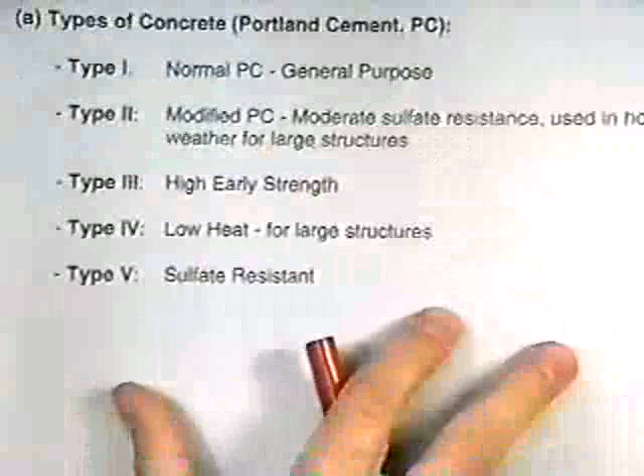First of all is the mixing of the concrete. There's all different types of cement. Basically it's called Portland cement, and it's a mixture of Portland cement, sand, aggregates, and water, and other types of additives, which creates a mix called concrete.

There's all different types of Portland cement. Type 1 is normal cement, which is basically what you see in probably 90% of construction - it's general purpose type cement. The second is a modified Portland cement, which has moderate sulfate resistance and is used in hot weather for large structures. Type 3 is an early strength type of cement, so it'll give you 28-day strength in 7 days. Type 4 is a low heat of hydration, used in dams and things like that. Type 5 is for a very corrosive environment where it's sulfate resisting.

Now, how do you proportion concrete? Normally it's designated as a ratio of cement to fine aggregate to coarse aggregate. The fine aggregate is your sand, the coarse aggregate is your stones. Typically this ratio is something like 1 to 2 to 3. The ratios can be in terms of weight or in terms of volume.

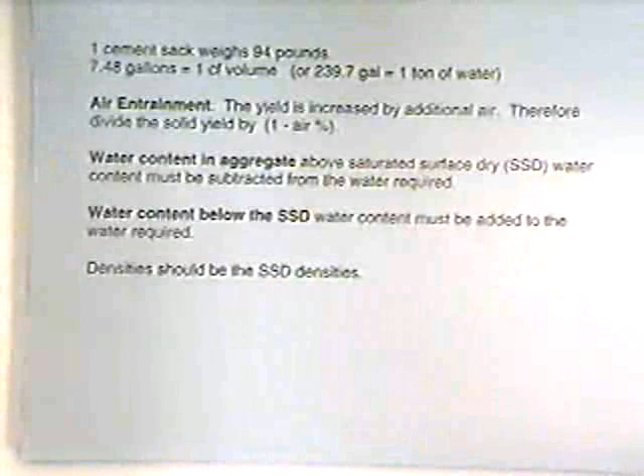We talked a little bit about air entrainment, or voids. You put some voids in the concrete for a lot of different reasons, temperature, etc. When you put voids into the concrete, it's going to increase the volume of your concrete. So basically we're going to increase the yield by additional air, and what you do is divide the yield that you expect in your concrete by 1 minus the percentage of air, which is going to give you a bigger quantity.

The water content in the aggregates above saturated surface dry must be subtracted from the total water required. Now, just imagine sand sitting out in a field, raining like crazy - that sand is going to be drenched, soaking wet. You have to figure out how much additional water is in that sand when you put it into the mix, and then subtract that off the water required for the mix. Same thing goes with stone - if it's very dry, you need to add additional water.

The density should be saturated surface dry. Normally that's specified by the manufacturer, by the batch producer. So here's a quick example.

A mix is designed such that the ratio between cement, sand, and stone is 1 to 1.9 to 2.8 by weight. The water-cement ratio is 7 gallons of water per sack of cement. So what we want to know is the concrete yield in cubic feet per sack of cement, and how much of each constituent is needed to make 45 cubic yards of concrete.

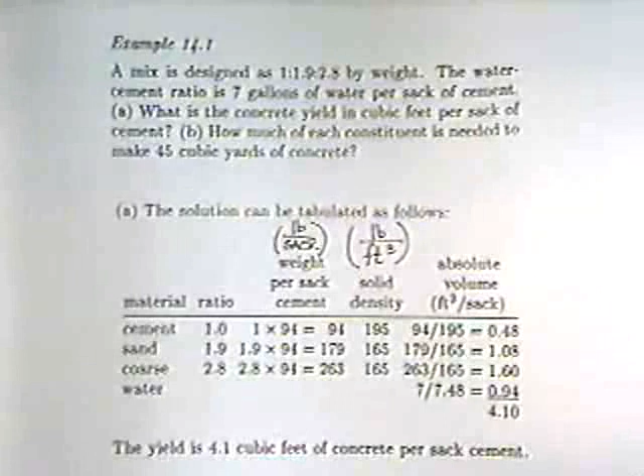Typically what you're going to do is set yourself up a little table. It's all a little mathematical trick - you watch your units, and then you can back calculate and figure out your yield. Your materials are cement, sand, and aggregate, with water down at the bottom. I already told you the ratio was 1 to 1.9 to 2.8.

If you talk about the weight per sack of cement, we know cement weighs 94 pounds per sack, so you multiply your ratios by 94, and you come up with 94, 179, and 263 pounds per sack. Now the solid density of each material is in pounds per cubic foot. If you divide your first column by the second, you get the amount of volume. Watch your units - the pounds cancel, and what you're left with is cubic feet per sack.

If you add the three terms up, plus the part required for the water, which is 7 gallons of water per bag of cement, and recall that 7.48 gallons of water is 1 cubic foot volume of water - if you add all these volumes up, what you get is 4.1 cubic feet of concrete per sack of cement.

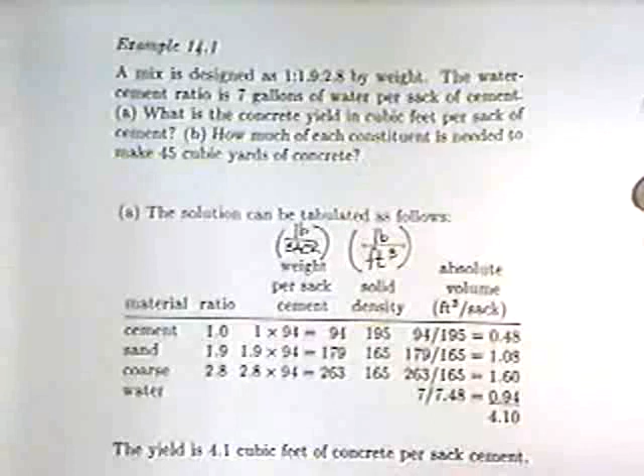So the number of sacks that you need can be found from this formula. We know we need 45 cubic yards, and 27 cubic feet is 1 cubic yard. If you divide this by the total yield we found before, watch your units, everything cancels out, and you're left with 296 sacks, or we can say 297.

So how much of each material do you need to order? It's the 297 bags times its ratio. Going back to that first sheet, the cement had a ratio of 1, the sand was 1.9 times the 94, and the aggregate was 2.8 times the 94. This gives us 26.5 and 39.1. You can figure out your total gallons of water, which turns out to be a little over 2,000.

So basically, you just watch your units with these types of problems. Second example: 50 cubic feet of 1 to 2.5 to 4 by weight of concrete are to be produced.

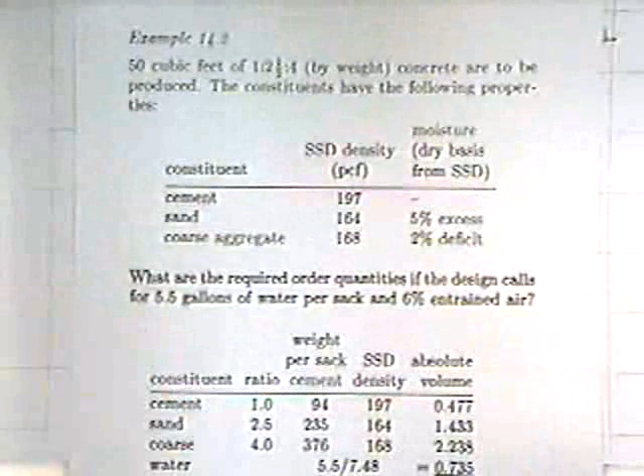The constituents have the following properties: cement is 197 pounds per cubic foot - that's the saturated surface dry density. The sand has 164 and the coarse aggregate has 168. Now the moisture is also given for each of these specimens - the sand has a 5% excess of water above the saturated surface dry weight, and the coarse aggregate has a 2% deficit.

So what's the required order quantities if the design calls for 5.5 gallons of water per sack and 6% air entrainment? Remember, air entrainment creates voids, and what we're going to do is increase the yield by 1 minus this percentage. You'll see that on the next sheet.

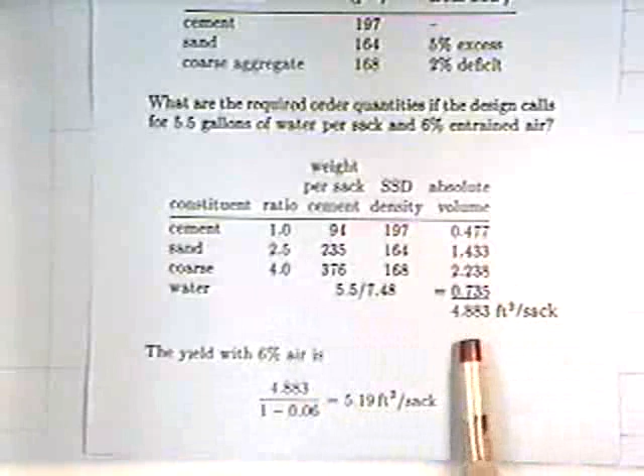So again, set yourself up a little table - you've got cement, sand, your coarse aggregate, and water. The ratios are 1 to 2.5 to 4. The weight per sack is 94, 235, and 376. Saturated surface dry you find from the previous table, and if you divide the third column by the fourth, you get the amount of volume, and when you add it all up, you get your total yield. This turns out to be 4.883 cubic feet per sack.

And again, because we're adding air to it, we're going to increase that yield. So we divide by 1 minus 0.06, and you come up with about 5.2 cubic feet per sack.

Now, if you need to make 50 cubic feet, what you need to do is divide your 50 cubic feet by the amount of yield based on 1 bag of cement. This gives you 9.63. So typically we would say, all right, let's use 10 bags of cement.

Okay, well in this problem they just used the 9.63, but you multiply your 9.63 for finding the required amount of sand. It's the 9.63 times 1.05. Now, the reason the 1.05 comes is because the sand has a 5% excess of water. The amount of sand that you're getting is actually a little less, that's why you have to use 1.05 here.

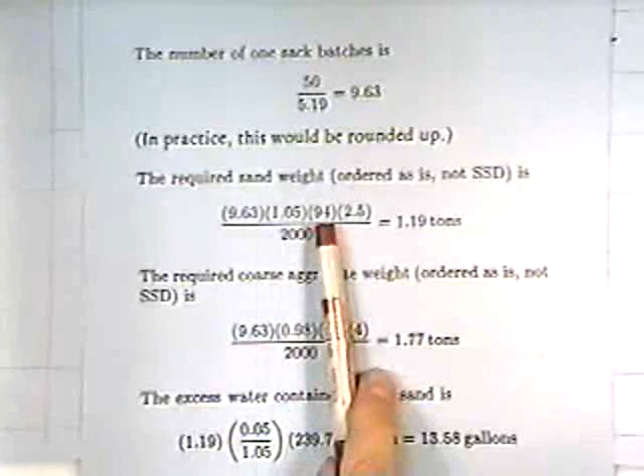Times the 94, which is the weight of the sack, times 2.5, which is based on the ratio between cement to sand. Divide by 2,000 to get you into tons. It turns out to be 1.19 tons.

Same thing goes for the coarse aggregate, except this time we have a 2% deficit of water, and that's where the 0.98 comes from. This gives us 1.77 tons.

The excess water in the sand you can calculate from this formula. It's the 1.19 tons from up here, that's the amount of sand that you're using. You have a 5% excess, divided by your 1.05 - that's basically just like a ratio, the amount of water as compared to the amount of sand.

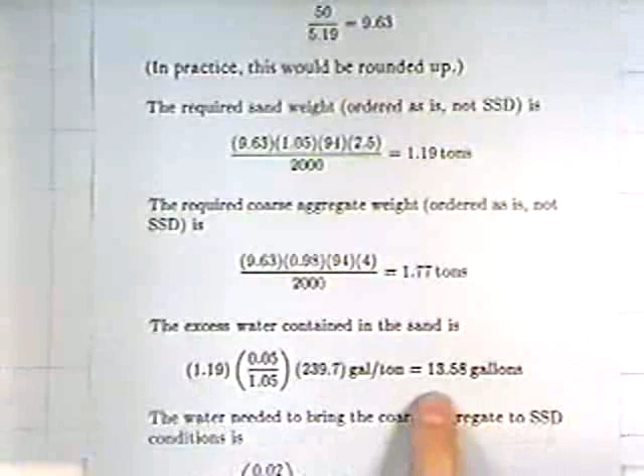Times your 239.7 - and I'm trying to think of where that comes from. That's gallons per ton. How many gallons per ton of water? The ratio, 2.3. This here, 239.7 is a constant. Okay, that's probably the weight per ton, right? So it's the amount of volume per unit of weight. Okay, that could be. And that turns out to be your 13.58 gallons.

And the same thing goes for the aggregate - you can figure that out, it's basically the same formula with the same constant. This turns out to be a deficit of 8.66 gallons.

So your total water requirements are the parts required for the mix, plus the additional part from the sand, which was the 8.66. And we know that the stone had an insufficient amount, and we needed to add on an additional 13.58. This gives us a total weight or total volume of water of 48 gallons. Okay, these types of problems are basically watching your units.

So would you subtract that excess water from the sand, the 13.58? Okay, so you got it - I'm sorry, I think I said that wrong. The 13.58 was from the sand, right, that's the additional part from the sand. The 8.66 is below the saturated surface dry for the stone. So when you figure out your total volume of water, it's the part required for the mix, plus the additional part that you need to add in for the stone, minus the excess from the sand. Okay, I think I said it right that time. I wasn't turning my pages quick enough.

Now, some of the properties of concrete. First of all, we have a slump test, and what that is, is a measure of concrete plasticity, how easy the concrete's going to flow. Typically when we do this test, it's going to be in the area between 1 inch and 4 inch.

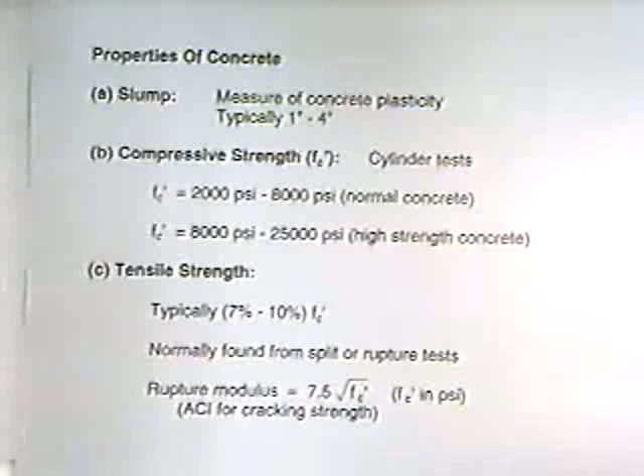The tensile strength in concrete is typically about 7 to 10% of FC prime. Concrete is very strong in compression but very weak in tension. We find the tensile strength either from a split test or a rupture test, and if we do the rupture test, ACI has come up with a conservative strength value of 7.5 root FC prime, where FC prime is in PSI. I'll be bringing this term up a little later in the lecture.

The shear strength is a little greater than the tensile, but still significantly less than the compressive strength. It's about 16 to 25% of FC prime. ACI, in section 11.3.1.1, says that the capacity of concrete in shear is 2 root FC prime times B times D.

The density for normal reinforced concrete is about 150 pounds per cubic foot. For lightweight concrete, it's about 120 pounds per cubic foot. The modulus of elasticity, the code in ACI says to use either one of these two equations. 57,000 root FC prime is sort of an easier one to use because you don't have to worry about this exponent, and typically this is about 3,600 KSI if your FC prime is about 4,000.

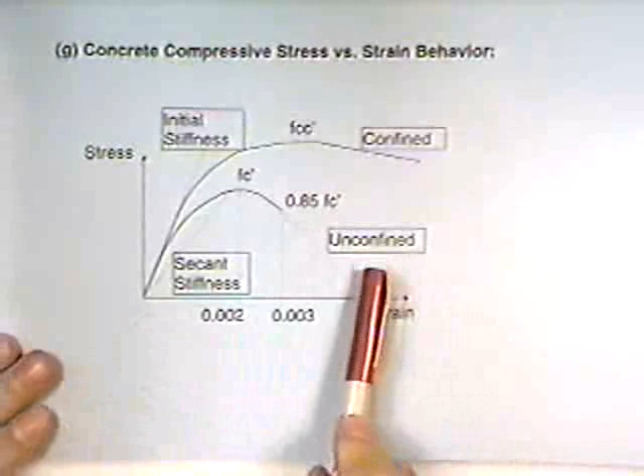Now, just think about if you take this cylinder and try to confine it laterally. What's going to happen is that the cement mix can have a lot more strength. That's a value referred to as F sub CC prime, and that increase in strength can go up from 20% to maybe as much as 50 to 75%.

The other big thing to note is that when it's unconfined, this point drastically fails very fast. It's very brittle. If you confine it, this level of strain can go out to a very large range, which means it's more ductile. For earthquake zones and when dealing with blast loads and things like that, you would always want your sections confined just based on this property alone. It's increased ductility. I'm not going to talk much about that.

Could you give an example of the difference between confined and unconfined concrete?

Okay, if you have your cylinder, what we're going to do is put a compressive load on it. If you just go ahead and load this thing until it fails, we're going to get that lower bound curve.

Just imagine if you came here and put some straps all the way around the cylinder, and then you load this guy up. What's going to happen is that failure plane—the way the cylinder is going to fail is sort of like this. It'll split on a diagonal fashion, close to 45 degrees.

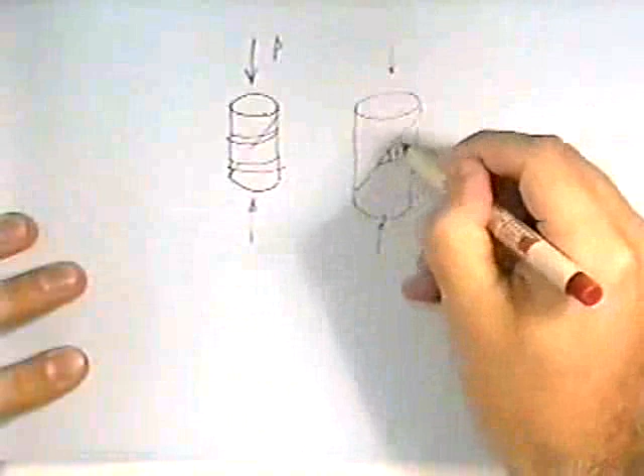Now if you come in here with these straps to try and prevent that crack, I think it's obvious that the strength is going to go up. Do you see that? And if you make these bands of a very ductile material like steel, what happens if these bars begin to yield? Then you can think about that yield deformation continuing to go on. It's going to be a much more ductile section.

Okay, so that's really what confinement is. And these are important for column members, for bridge-type structures—think about your piers. In all these earthquakes, whenever a bridge falls down, it's pretty much at the pier. If you look, it collapses right below the slab deck or right above the footing, because that's the maximum stress zone. Part of the reason is because it fails in shear, like this type of mechanism. One way to avoid that is to put in additional straps, to avoid that failure mechanism.

So what we're doing is—the original situation may have performed like this, where once you got to this level of force, the strength degraded really fast. But during an earthquake, you really don't know what the level of force is. So what if it hits its peak? The only thing we want to do is make sure that it can take additional deformation. And you see when a specimen is confined, it could take that additional deformation. Deformation corresponds to strain.

Same thing goes in a blast type load, or hurricane, or any other type of catastrophic load. I doubt if you'd be asked that in the PE though.

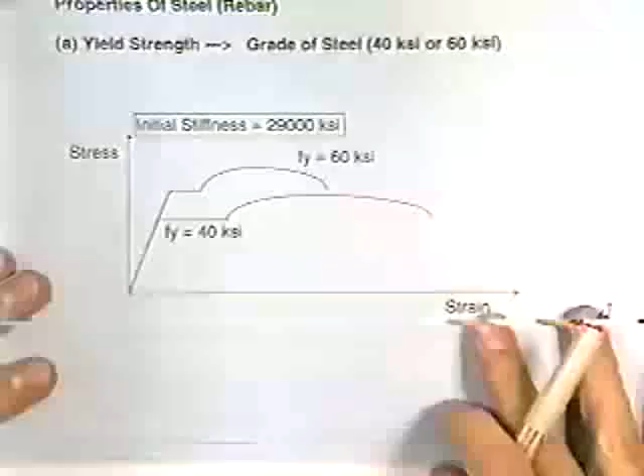Now, rebar—I think everybody knows what its characteristics are. Again, stress versus strain. If you have a grade 40 bar, it's going to load up basically along a linear line. That stiffness, E, is about 29,000 KSI. Once it hits its yield strength, there's what's called a yield plateau, and then there's a slight increase in strength. That's called strain hardening, until it reaches its maximum value, and then finally fails at its fracture strength.

The only one that we're really concerned about is its yield strength, because that's the one we're going to design with. The difference between grade 40 and grade 60 steel: number one is the increase in strength, and number two, you'll notice the grade 60 steel did not go as far in strain or deformation. The reason is because it's a little bit more brittle. But still you have considerable ductility even in the grade 60 steel.

When you start getting up to 120 grade steel, those things will load up, hit its peak strength, and then come down and collapse right here. So you can see it's very little ductility, and a lot of pre-stressing tendons have this type of characteristic. So what you do for this case is just make sure that your demands are always in here and you don't have anything to worry about. For rebar, if it hits its yield strength, so what? You still got all this deformation capacity back here.

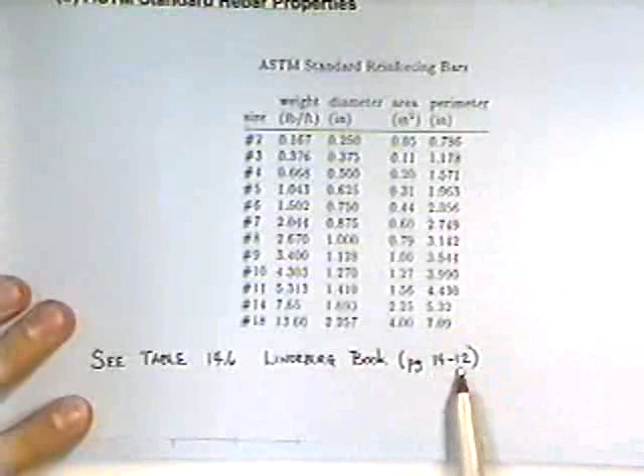I'm also going to leave you a little note here—it's on page 14-12 of the Lindeberg book. I believe this table has all the different sizes of bars plus the number of bars quantified. So if you have an area of steel required of, say, 6 inches squared, you can look up into that table and try to figure out what's the best combination of bars to use to match that 6 inches squared. So that's a handy table too.

Is that true? Well, yeah, that 8/8 bar, 7/8 bar, 6/8 bar numbering, past number 8 bar, that doesn't work anymore. For instance, look at number 10 bar - it doesn't have 10/8 for the diameter, does it? It's close, but not exact. I think it's a good approximation though.

But anyway, you've got all the numbers - you've got the tables in front of you. And you don't want to do pi d squared over 4 anyway. You just want to pull it right out of the table.

All right, now as far as concrete goes, it's ultimate strength design. There's no allowable stress design. I guess you guys are accustomed to that because you're using LRFD.

What we're going to do is take the actual loads and multiply them by what's called the load factor. And then we're going to compare that with loads that cause failure. We're going to try and find out what's the maximum that you can actually take the structure out to. That's how we're going to design it.

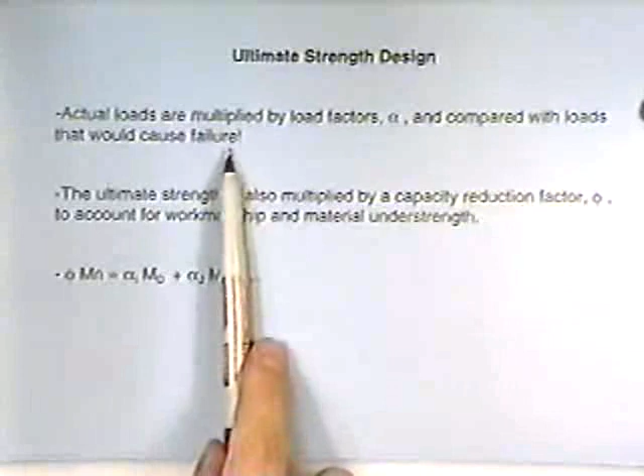And then we're going to check it for service type loading, so for deformations and things like that. I know a lot of times you'll be walking in a building and you'll find out that as you walk across the floor you start bouncing around.

Those are serviceability problems, not ultimate strength type problems. What we're worried about are earthquakes and things like that, or if you just came into a room and fully loaded it up with all the live load and dead load that you possibly can. You just want to make sure it doesn't collapse under that scenario.

Ultimate strength is multiplied by what's called a capacity reduction factor. Sometimes it's called an undercapacity factor, and it's defined as phi. What this does is, it's typically been referred to as a dummy factor, and it accounts for workmanship and material understrength and things like that.

So basically your equation is going to be phi times Mn, which is the nominal capacity, equal to the summation of all your alphas times your certain moments. So you'll have a certain load factor for dead load, plus a certain load factor for live load. And on the next sheet...

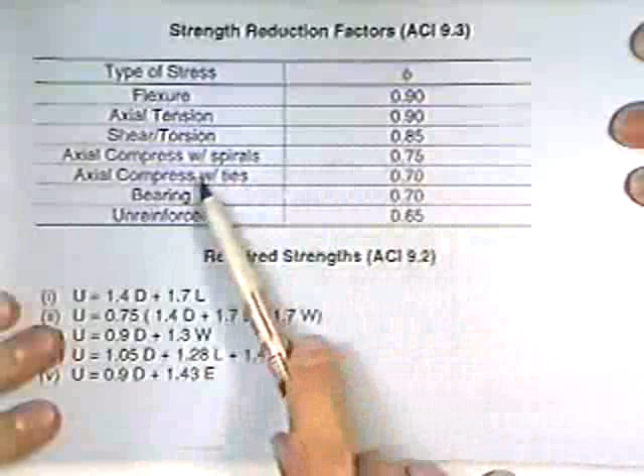Actually I quantify the phis first. If you're dealing in flexure, if you have a beam and you're dealing in bending, the phi is 0.9. If it's an axial tension member, it's 0.9. Shear and torsion is 0.85. Axial compression with spirals is 0.75. Compression with ties is 0.7. Bearing is 0.7. And unreinforced is 0.65.

The reason it's going down is because of the uncertainty. Just think about unreinforced as compared to flexure - it's a lot easier to find a flexural strength than it is to find an unreinforced strength. So that's why that factor goes down the whole way. This is ACI 9.3.

Now, again, what's a spiral? If you're in a column - confined concrete - and let's say your column is square, typically you'll have bars in the corner. And what you're going to do is provide what's called a hoop or a stirrup around these bars. This is referred to as a tie.

Now, if you're in a circular column, where your longitudinal bars are spaced around the diameter, you're going to put this stirrup in, which does something like this. If you look in elevation, these are your bars. It's going to be some type of spiral that goes all the way around, something like that. You understand that? Yes, thank you.

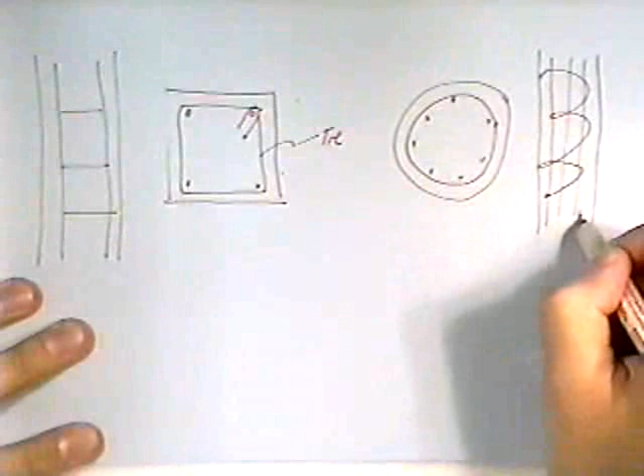Okay, where in cross-section for this guy, it's going to look like this. As far as confinement goes, this guy is much better. If you look inside the core here, as compared to this corner here, what happens in the corners is that you have some discontinuity, and you lose some confinement based on the corners, whereas if it's in a circle, it's a lot easier to confine something.

Just imagine wrapping your hands around something that's circular versus something that's square or rectangular - it's a lot harder to get your hands around it. So the effectiveness of the confinement is better for a spiral. Thank you. Okay.

Alright, now we went through the phis. As far as the load factors go, it depends on what you're looking for. If you're designing for dead load and live load only, there's only one combination to check: the ultimate demand U equals 1.4 times the dead load plus 1.7 times the live load. This is quantified in section 9.2 of the code.

If you have to deal with wind, there's two additional equations that develop. You get 75% of 1.4 dead plus 1.7 live plus 1.7 wind, and 0.9 dead plus 1.3 wind. So if you're designing a building for dead load, live load, and wind load, you need to check all three of these load combinations. What do I mean by check? You need to find shear and bending moment diagrams for each of these cases and develop what's called a moment envelope. Put all of these demands together, and whichever gives you the biggest moment, that's the one you design for.

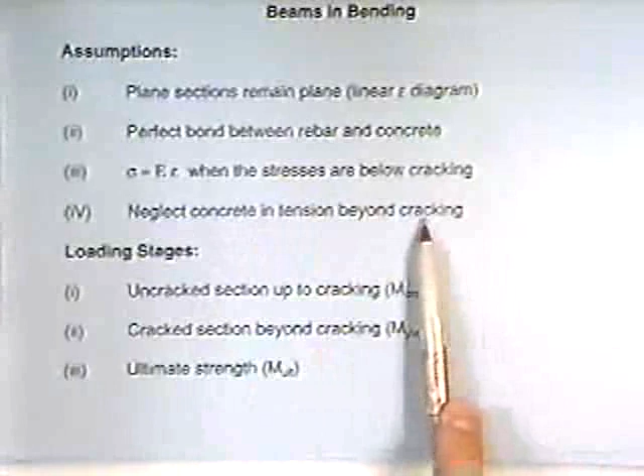This is elastic. Now, when the stresses in the concrete in tension exceed its cracking strain, the concrete is basically gone—there's nothing there. So what we do is neglect it. We only consider the concrete in compression when we're beyond the cracking strain, and this is important for ultimate strength. The criteria in number 3 here is important when we're considering service loads, when we talk about deflections.

The loading stages—there's three of them. Initially you have this beam with no load on it. So is any part of the concrete cracked? Probably not. Alright, so if you start to put a load on this beam, the concrete is going to continue to load, but it's still in the elastic region. It'll stay elastic up to its cracking strength, and that cracking strength I define to be M crack.

Now once it exceeds this value, the concrete cracks and the stiffness of the beam changes. That's going to basically load up along one linear line up to its yield strength, and that's when the rebar at the bottom begins to yield. It'll continue past this point up to its ultimate strength. Now I'm going to carry you through these three load stages.

The one that's important for flexure is this one. The one that's important for deflections is this one. This is because there's an equation where you have to find M crack and M ultimate, and I'll show you that later.

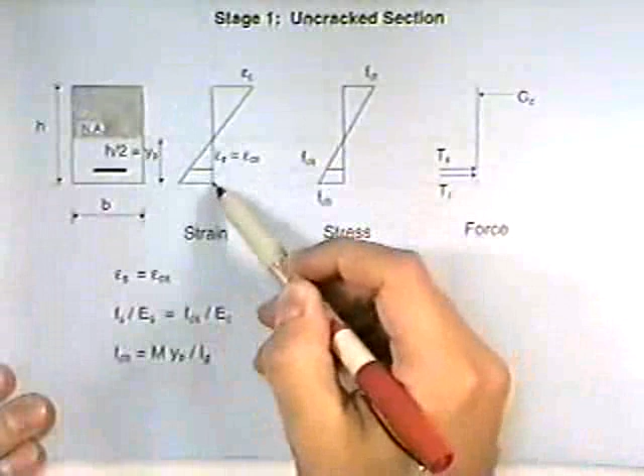Well, how do we find this cracking moment? You find that from strength of materials. We already know that the bending stress is My over I. Typically what we do to find the cracking strength is substitute for the stress F sub R, which is the rupture modulus—that's on the next sheet. So rupture modulus times I gross divided by Y sub B, where Y sub B is the distance from the neutral axis to the extreme tension fiber. F sub R is the allowable stress—in other words, once you exceed that stress, the concrete cracks. That's how we're going to determine our bending moment.

Now, once we exceed that crack capacity, what's going to happen is that the concrete at the bottom is going to begin to crack. The cracks are going to develop vertically, and that's why I got those dotted lines in there. Those things are cracks.

Now, above the neutral axis is where your concrete's acting in compression. You have your area of steel down here at the bottom, at a distance of D from the top. The distance to your neutral axis is what I define to be as X. The height is h, the width is B.

So because the neutral axis hit this point, we had cracking, the strain diagram looks like this, where we know this strain exceeds the cracking strain in concrete. The stress diagram is going to look something like this in compression, but notice there's nothing here at the bottom, again, because the concrete cracked and is no longer acting. The only thing that's acting on the bottom is the steel, so you have your stress in the steel, F sub S.

So what we're going to do to find this moment now is we have our stress distribution in the concrete in compression. This is a triangle, and what we're going to do is relate this stress back to a force, C sub C. We know the tension force here in the steel, and we have this moment arm, JD. Once we know JD and we know either C or T, we can find its moment, its yield moment.

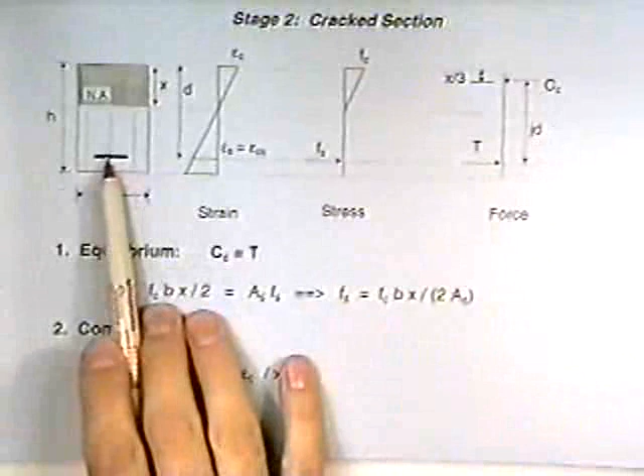Now here's how we're going to do this. Number one is equilibrium. This section is not moving, so the sum of forces must equal zero horizontally. So C sub C has to equal T. C sub C is the stress at this point, which is F sub C, times the area of the triangle. The area of the triangle is the base, which is this width, times the height, which is x.

Because it's a triangle, we have to divide by 2. The area of a triangle is 1/2 base times height. So you take your stress and multiply that by the area in compression of concrete, so that's F sub C times B times x divided by 2. T is just equal to the area of steel times the stress in the steel, which we know is F sub S. So what we're going to do is solve for F sub S, which is equal to F sub C times B times X divided by 2 times the area of steel. Is everybody with me up to here?

Okay, the next law is what's called compatibility. Just take a look here, you have a linear diagram, right? Well, what we're going to use is similar triangles. If I say that the strain in the layer of steel is epsilon sub S, the strain in that layer of steel divided by the distance from the neutral axis down to that rebar, which is a distance of d minus x, is equal to the strain in the concrete divided by x.

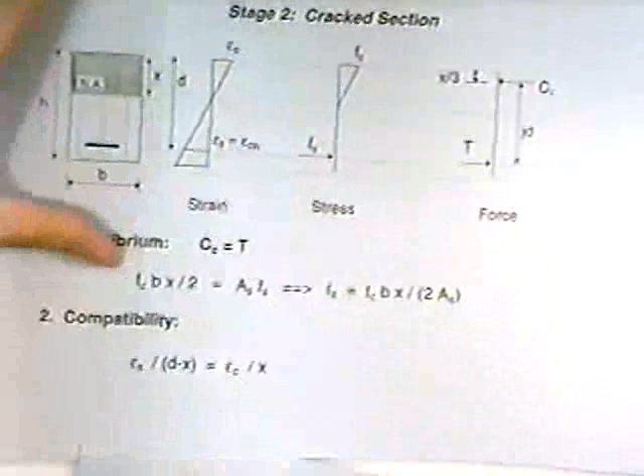Now the third law is what's called Hooke's law, or the constitutive law, and that's when we know that the stress is equal to the modulus times the strain. So we know the stress in the steel is equal to the modulus times the strain in the steel, and the stress in the concrete is the modulus times the strain in the concrete. Now, if you substitute these strains into here, and then plug those back into your first equation, what you get is this equation on highlight 4.

You get x squared is equal to 2 times n, where n, I guess I don't have that here, n is the E of the steel divided by the E of the concrete. So you get x squared plus 2n times a sub s times x divided by b, minus 2n times a sub s times d divided by b. If you take a look in this expression, the only thing you won't know in this section is x.

Rho is equal to the area of steel divided by BD, that's the reinforcement ratio. And what I'm going to do is define another term, which I'm going to call KCR, or K crack, and that's equal to x divided by d. Now if I plug these two equations back up into here, what I get is one expression for K, and that's equal to the square root of rho n squared plus 2 rho n, minus rho times n.

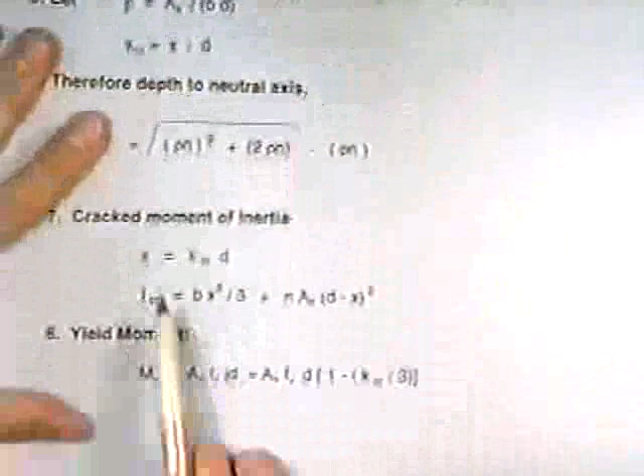Now, once I know this K, I can find back my x. I already told you before that K was equal to x divided by d, so I can back calculate and find now x. It's just K crack times d. And K crack is just equal to what now? Well, let me go back to that first sheet.

What's the moment of inertia of this section? You have the concrete in compression and the steel at the bottom. What's its moment of inertia about the neutral axis? It's 1/12 the base times the height cubed, plus the area of the concrete, which is base times x, over 2.

Or, that's the same as saying it's 1/3 bx cubed. There are two different ways of doing that, but the easier thing is just to use this equation: bx cubed divided by 3. Then you have the part from the steel, which is the area of steel times n to get an equivalent section, times d minus x squared. D minus x is the moment arm from the neutral axis to the area of steel.

I have a question. I understand where you came up with that, but you made a statement about your inertia being equal to 1/3.

This guy here, you mean? The moment of inertia of a rectangle about its base is bh cubed over 3. That takes into account the bh cubed over 12 about the centroid plus the AD squared. Add all those terms together, and the moment of inertia of a rectangle about its base is bh cubed over 3 -- that's where we want that concrete part. Then you add the AD squared for the steel. There are two ways of doing it.

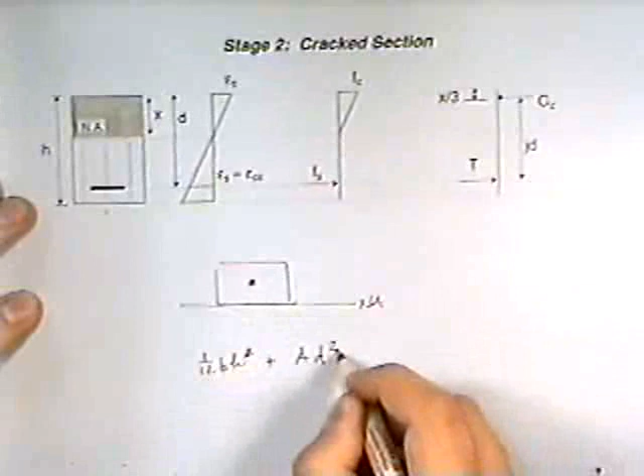If you have a rectangle, here are the axes I want to take my moment of inertia about. The moment of inertia of this rectangle about its own centroid is 1/12 bh cubed. What is the parallel axis theorem? It says you have to add on AD squared, where A is bh and D is h over 2 squared. This thing is just equal to 1/3 bh cubed.

It's a good thing that screen is fuzzy, because you guys look a little lost. Am I right?

Anyways, that's just some statics. I have a question, I just want to clarify this in my head. What we just did was calculate the yield moment and the cracking moment of a concrete beam with rebar in the bottom, some kind of reinforcing steel. What we have is a cross section of the beam, which is the cracked section -- that's what we're looking at. The bottom two-thirds is cracked, the top bit is not cracked.

So we basically went exactly like you said. We found two of its strength limits: number one was the cracking strength, and number two was its yield strength. Now the third state is, if you continue to load it, you're going to take it out to failure -- that's its ultimate strength. So what happens in ultimate strength? Well, the cracking may go up a little further.

Your concrete here in compression is now a distance I call C, the depth of the rebar again is D. Strain diagram looks like this. Under ultimate conditions, the strain in the concrete is 0.003, always -- that's what ACI tells you to use. Your linear strain diagram goes back such that the strain in the layer of steel exceeds epsilon sub y, so we know the stress in that steel is equal to Fy.

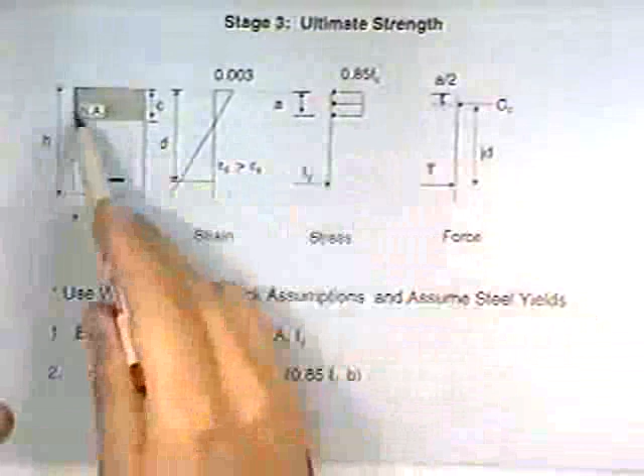Now, when the concrete goes into compression at ultimate, we use the Whitney stress block. This takes 85% of FC prime over a depth A, which is equal to beta 1 times C -- I have that on another sheet -- times the width B. So this is our stress diagram.

The force, obviously the stress from the concrete gives us C sub C, and the tensile stress in the steel gives us T. The moment arm between these two is JD, so to find the moment capacity, it's just T times JD. I'll show you how to calculate that now.

Again, start with equilibrium: C is equal to T. Since we know this guy yields, it's just the area of steel times Fy. So if I gave you a section with width B, height H, and an area of steel at the bottom, all known, you can find C and T just from this expression. Now, C sub C, we also know, is 0.85 FC prime times A times the width B.

Okay, so if you set that into this equation, what you can do is find this compressive depth A. It's equal to AS Fy divided by 0.85 FC prime times B.

Alright, again, I told you what K was. K is just A divided by D. So if you put that in, K turns out to be equal to AS Fy divided by 0.85 FC prime B times D.

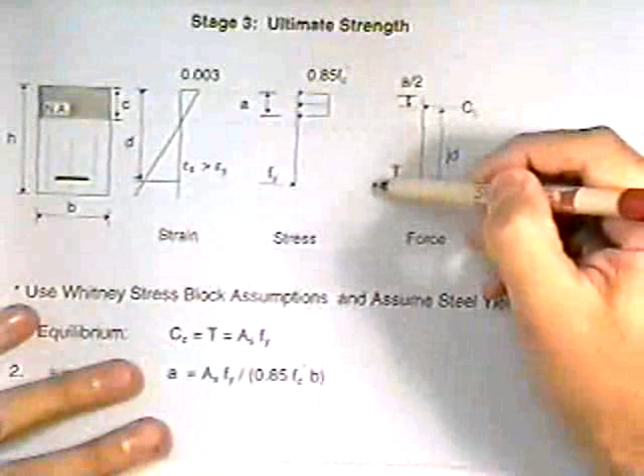Now, once you know K, the ultimate moment capacity is just T times JD. T is equal to AS Fy, and JD is the moment arm between those two forces. If I know this distance is A, C has to act at A over 2 from the top.

And if the full distance down is D, then it's just D minus A over 2, or to put that in terms of a quantity of K, this gives me D times 1 minus K over 2.

So why did I present all that stuff? I wanted to give you flow charts, and that's what I'm going to give you now. But you have to understand where it all comes from. I know it's probably been a lot of years since you guys have looked at this, but I think it's worth it because it's going to get you in the right frame of mind for this exam.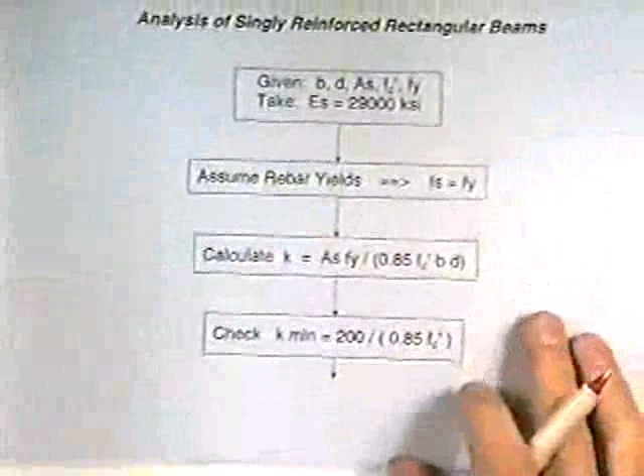Alright, now this is an analysis of a singly reinforced rectangular beam. You're given B, D, the area of steel, FC prime, and FY. We're going to take the modulus of the steel to be equal to 29,000 KSI, and we're going to assume that the rebar yields.

Now, there are specifications in the code that tell you that bottom steel has to yield, and the reason is for ductility. So by making the assumption that the bottom steel yields, that's a good assumption.

Now, if we assume it yields, K can be calculated from this formula: it's just AS Fy divided by 0.85 FC prime BD. And if you look at your given values, it's all known, so you're finding your compressive depth in the concrete. Then what you need to do is check this versus K minimum.

K minimum is defined in the code as 200 divided by 0.85 FC prime. If your K exceeds K minimum, then you have enough area steel in your section, and it's not under-designed. If K was less than K minimum, then you're going to have to increase the amount of steel. Now, once you know your K, you check it versus K minimum.

If it was no good, then the section's inadequate. You need to increase the reinforcement ratio. If K is greater than K minimum, you can continue on.

Now we're going to compute beta 1. Beta 1 is 0.85 minus 0.05 times FC prime minus 4,000, divided by 1,000. FC prime has to be between 4,000 and 8,000 PSI, and for normal concrete it falls into that region. Beta 1 is going to turn out to be between 0.65 and 0.85. If you're using 4 KSI concrete, beta 1 is going to be equal to 0.85.

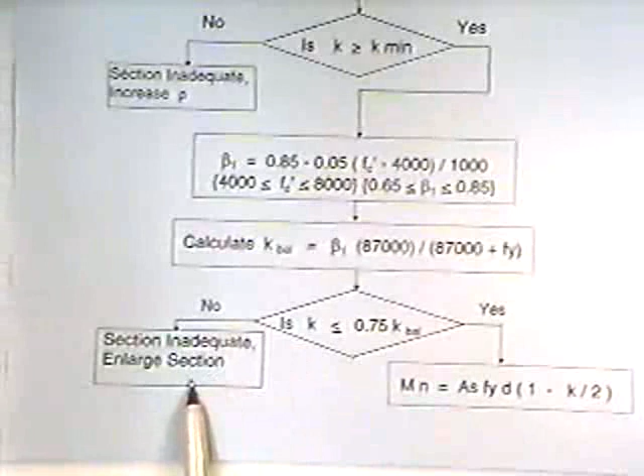So if K is less than 75% of K balance, the moment capacity is found from this formula. If K is greater, then the section is inadequate and we have to increase the section—add more concrete or decrease the amount of steel. Okay, so that's how to analyze a beam.

For design, what we know is that our nominal capacity times this understrength factor, phi, must always be greater than our demand. And the demand is the load factors times the dead loading plus the live load. Again, phi for bending is 0.9.

K must always be less than 75% of K balance. This ensures a ductile failure. Ultimate strength refers to failure.

Select the height of your section based on deflection requirements from Table 9.5A of ACI. If you use this table, it's going to specify for you, it's going to approximate the depth of your section. So if you have to design a beam, what depth do you go with? Well, here's the first place to start because it'll give you some idea—go to your Table 9.5A and you can come up with some approximate depth.

Choose FC prime, Fy, the width of the beam, and the area of steel. Typically the B to H ratio, in other words the width to the depth, is in an area of 1 to 1.5, somewhere between 1 to 2.

On our beams, we always want the steel to fail first before the concrete. Is that what you mean by a ductile failure? Right—just think about the stress-strain curve for the concrete when it's unconfined. Once it reaches peak strength, it goes right down. Then think about what happens for the steel: it hits its yield point, and then it goes on forever. The steel is more ductile, so we would want the failure to develop there.

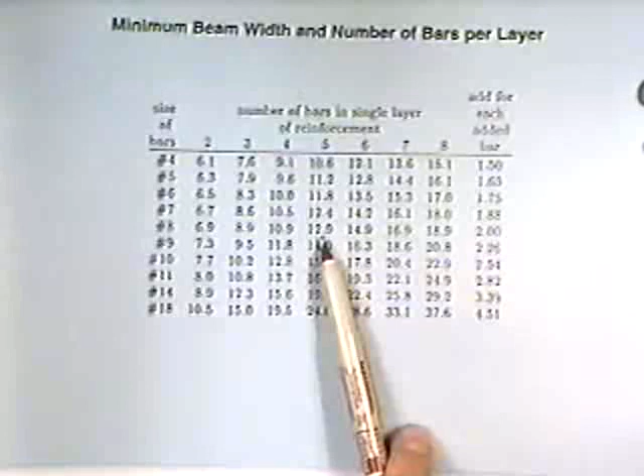If you found out in your chart that you needed 5 number 8s and the width of your beam is only 12 inches, well, you can't use one layer—you've got to go to two layers, or else increase the width of your beam. So this is a handy chart. Okay, here's the design process.

We first of all determine your demand moment, and again, this is from statics. Typically this is going to be 1.4 times the dead load plus 1.7 times the live load.

You select FC prime and FY. Step number 3 is you're going to select K. Let's say that K is 30% of K balance. That's a good number because we know that the maximum we can use is 75%, and we really don't want the concrete to fail, so 30% of K balance is sort of like an optimum value. Let's start there and see if that works. K balance, again, we find from this formula.

Now, assume a B and find D. You have an equation here, and what this is just the moment capacity, which is equal to C times JD, except it's all carried out for you. BD squared is equal to the moment demand divided by phi divided by 0.85 FC prime K times 1 minus K over 2. We already assumed K up here, we know our design moment, we know FC prime and we know phi. So if we assume a B, we can calculate D. And again, we want to keep this ratio in between these two limits.

Now to find the required area of steel that you need, it's just the moment divided by phi divided by Fy D times 1 minus K over 2. And again, you know everything on the right side of this equation.

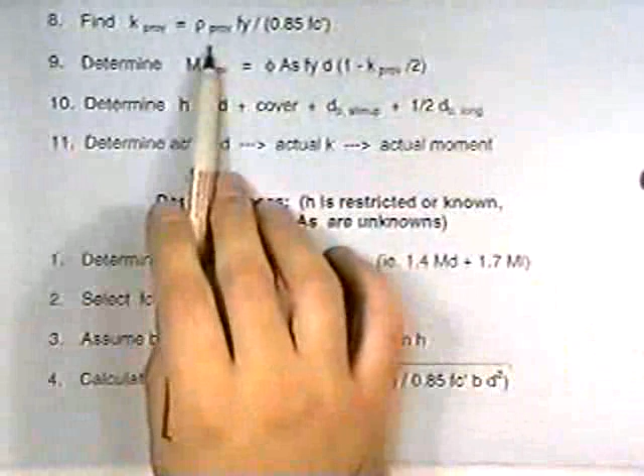Now once you know the area of steel, calculate your K provided. K provided is just rho provided, where rho is the area of steel divided by BD, times Fy divided by 0.85 FC prime. The moment provided now you find from this equation, the full height that you need in your section.

Remember, you assumed a B, you calculated a D. Well, what's the total height of your section? That's the depth to the reinforcement, plus any cover, plus the diameter of a stirrup, plus half the diameter of the longitudinal bar. So that's how you determine your actual H. If this number turns out to be 18.3, well, you can't go out and build a beam that has a depth of 18.3. You got to make it 19.

And when you make that 19, if the cover, the stirrup, and the bar don't change, the only thing that's going to change is D. When D changes, K changes. So you calculate your new K, and then calculate your new moment.

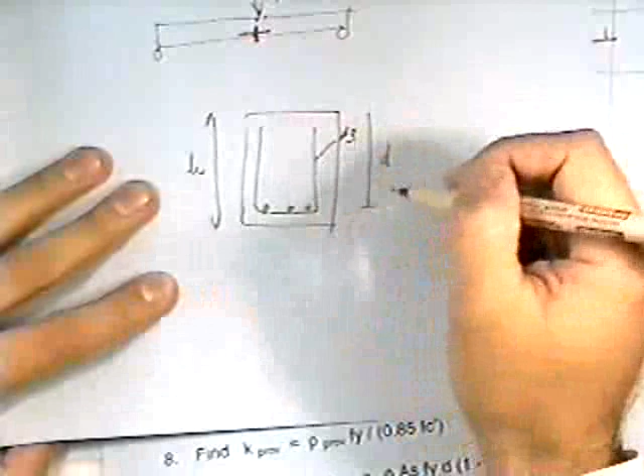Let me show you what this will look like. This is the full depth of your section H. Your bars are down here at a distance of D. The stirrup wraps around these bars. If we say this is a number 3 bar, that has a diameter of 3/8, plus the cover here at the bottom. And the half a bar diameter, again, because D only goes to the centroid of these bars, it's half this bar diameter plus the stirrup plus the cover.

The stirrup is for shear. Now, I haven't talked about shear yet. This has only been for flexure. That's coming up.

Now, if you know an H, so you got some architect and he says this beam can be no deeper than 2 feet, then you know your H. It's restricted. And what we don't know is the B and the A sub S. So what we're going to do again is compute the demand moment, select your FC prime and FY, assume a B, and calculate the D based on the known H.

Now you can calculate K from this expression. Once K is known, we have to check that, make sure it's less than 75% of K balance. And once that's the case, the area of steel required can be found from the same formula from the previous sheet. The minimum area of steel is 200 times BD divided by FY.

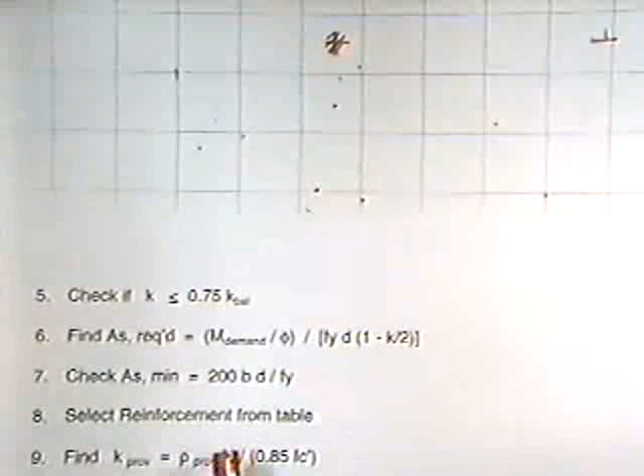Select the area of steel now that you need based on the required amount. And then find your K provided. Again, that's rho times FY divided by 0.85 FC prime. And then you can calculate your moment provided, and make sure this exceeds the demand.

These last 10 pages are just manipulating the previous equations from those three parts, or three stages, from before. That's all I did was change the equations around to fit the design process.

Did I lose you guys? Hey, Joe?

I'm going to assume that all the numbers in the Lindeburg book, where he goes through all the different cover requirements, bar spacing and all that, are basically to code. He gives you all the numbers for you. That's correct.

Alright, now here's a quick example problem. It says design a rectangular beam with tension reinforcement to carry service moments of 34,300 foot-pounds of dead load, 30,000 foot-pounds of live load. FC prime is 3,500 PSI, FY is 40,000 PSI, and number 3 bars are used for shear, so you have a number 3 stirrup.

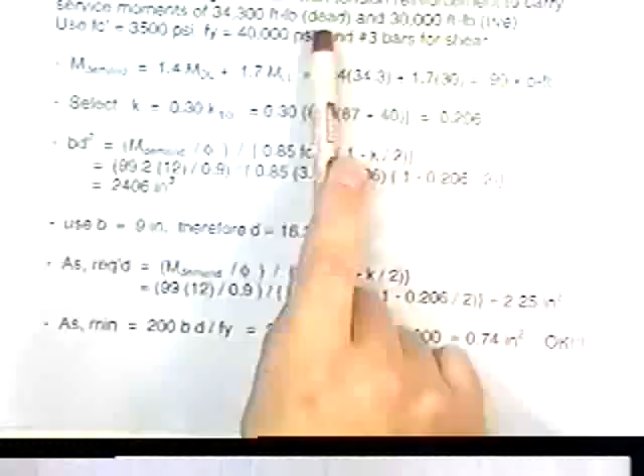This looks like a problem, except again for line 2 here, where they're giving you the dead load moment, the live load moment. Typically, they won't do that. You'll have to find those numbers from statics.

From a shear and bending moment diagram, right? You compute that from statics, and then you can continue on with the rest of the problem. So yes, this is a problem that could be on the exam, something like this.

Okay, so you can compute your demand. It's 1.4 dead plus 1.7 live. If you multiply everything out, you get 99 kip-feet.

Okay, again select K using my flow chart. K is 30% of K balance. If you plug in your numbers, substituting FY here, it turns out to be 0.206.

Alright, now based on this K and your demand moment, and the FC prime that you assume or calculated, BD squared turns out to be about 2,400 inches cubed.

So if I assume a B of 9 inches, D turns out to be about 16.35. And again, that's in the right range, between 1 to 1.5 and 1 to 2.

Now, based on this BD, let's calculate the area of steel required. It's the moment divided by phi, divided by FY, D times 1 minus K over 2. When you multiply everything out, watching your units as you plug them into these equations, the area of steel turns out to be 2.25 inches squared.

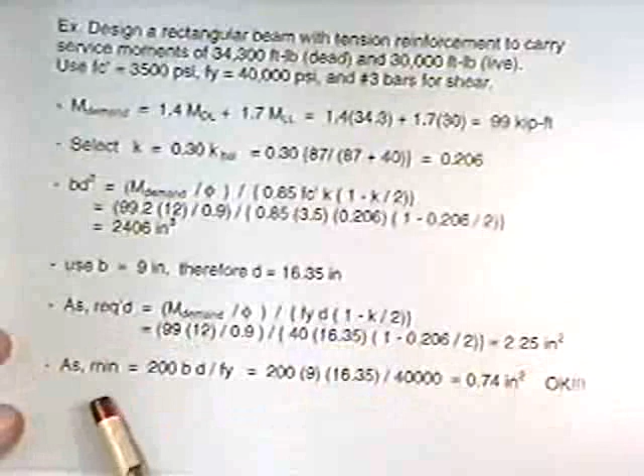Okay, the area of steel minimum is 200BD divided by FY. If you substitute those, you get 0.74 inches squared. You see that what's required exceeds the minimum amount, therefore we have to design for the required.

Okay, now 3 number 8 bars will provide 2.37 inches squared of area of steel. So that'll work fine. Now let's calculate the full height of our section.

It's the depth D, which we already found before, that's 16.35, plus half the diameter of a number 8 bar, which is half an inch, plus the diameter of a number 3 stirrup, plus the cover. The cover is 1.5 inches on a beam. So when you add all these things up, you get 18.725 inches.

Again, you can't design a beam to have this depth because a construction worker will think you're nuts. What you've got to do is make it 19.

So if you make this 19, the D actual changes again. It's 19 minus the cover, minus the stirrup, minus half the bar diameter of a number 8. This gives you 16.625. K provided now is the area of steel divided by BD, FY divided by 0.85 FC prime. This turns out to be 0.213, which again is less than 75% of K balance, so it's doing good.

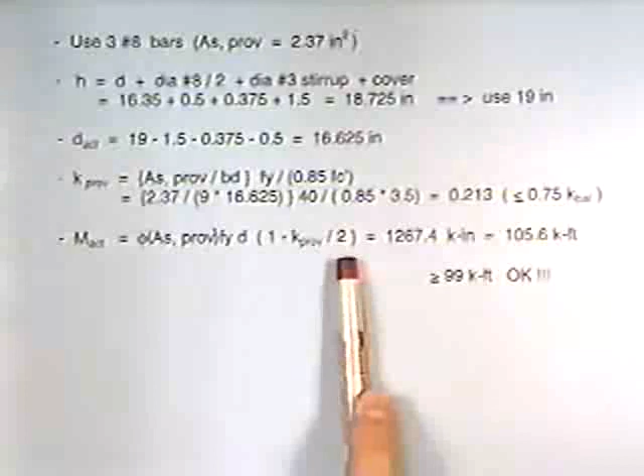The actual moment now is AsFY D times 1 minus K provided divided by 2. And if you multiply this by your under-capacity factor for bending, which is 0.9, what you get is 105.6 kip-feet. This is the most that you can have for demand. Our demand was 99, so our capacity exceeds the demand. The beam is satisfactory for bending.

Okay, that's sort of a quick example problem for bending. Alright, now the next piece goes into T-beams, and this is more or less along the same lines as the previous.

Now, the first point I want to talk about is the effective flange width. If you're building a floor where you have beams and slabs poured together monolithically, it's reasonable to assume that part of this slab is going to act with this beam as it bends.

The code tells you what value you can use here for B sub T. It says that B sub T has to be less than or equal to L divided by 4, where L is the length of the span of the beam. It also has to be less than B, the width of the beam, plus 16 times the thickness of the slab. And it must also be less than or equal to S0, where S0 is the distance to the next adjacent beam. Okay, I put that here on the drawing.

If you have an isolated T-beam -- isolated T-beams are used a lot in bridge construction where beams are prefabricated and the T is actually a T shape, like an I shape -- there are certain specifications for these types of structures. B sub T must be less than 4 times the width of the beam at the bottom, and this width at the bottom must be less than or equal to 2 times the thickness of the slab.

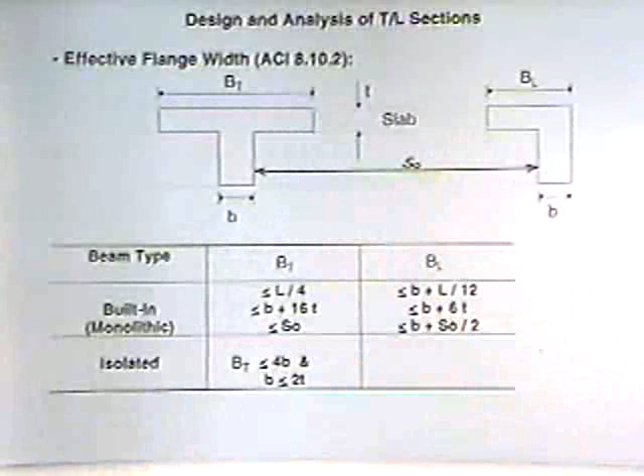All this slab over here you can't use in your bending moment calculations. Why is this going to be good? Well, that's what I'm going to go across to my next sheet.

Remember, when concrete goes into compression, that's a good thing. So look what happens in this T-beam, how the compression zone spreads out into the slab. We can take advantage of that, because the more compression you can put up here in the flange, the bigger your moment arm, JD, is going to be. So your flexural capacity would be increased. That's the big thing with T-beams.

But no fair taking more of it than you really deserve -- that's why you limit the top B. Not all the time does the slab act with the beam; obviously, 50 feet away from the beam, that slab doesn't act with it. So B is found, that width is found, for the flexural capacity of this beam, such that the slab could be included up to this width B and nothing else.

Alright, now... I have a question. Yes, sir. The difference between a monolithic and isolated beam, once again, is that the monolithic beams are all joined, and the isolated beams are physically separated.

That's correct. So for example, monolithic would be: you go out, you have your formwork, and in this formwork you're going to have room for beams and slabs to be poured together. The beam and slab are all going to be poured in the same pour. An isolated T-beam, for example, would be something that's prefabricated and brought out to the site -- it's like an I shape, except it looks like a T -- and then the slab would sit on top of that. That's used a lot in bridge construction.

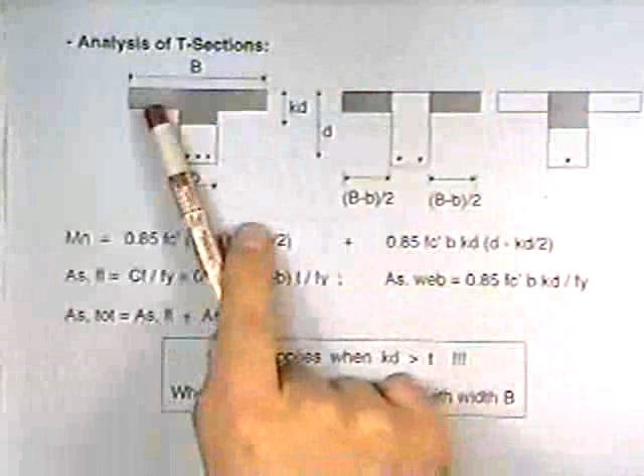Now, the way we're going to find this moment capacity -- and I'm just going to summarize this quickly -- is we're going to do it in two parts. We're going to find out what the moment capacity of this section is, neglecting the compression in the web, just considering the part in the flange. Then we're going to add this moment capacity to the moment capacity when the concrete in the web goes into compression. So we're going to sum these two parts.

Now, the first note is that K times D -- remember, K is the depth to the neutral axis, KD is the depth to the neutral axis -- this only applies when KD is greater than the thickness of the slab. When it's less than the thickness of the slab, that's all it is, a singly reinforced beam of width B. Remember what we did for a rectangular beam: we had a certain part of it, the top part, in compression, right?

And then what we did was we figured its width and its depth, and then found the moment arm between the area steel and the centroid of the compression zone.

Well, what happens now if only the flange is in compression? You still have a rectangular block that's in compression, so it would be 0.85 FC prime times B times the depth that's in compression, as long as it's only in the flange. If it dips into the web, then you use this procedure. So what we're going to do is add this case to this case.

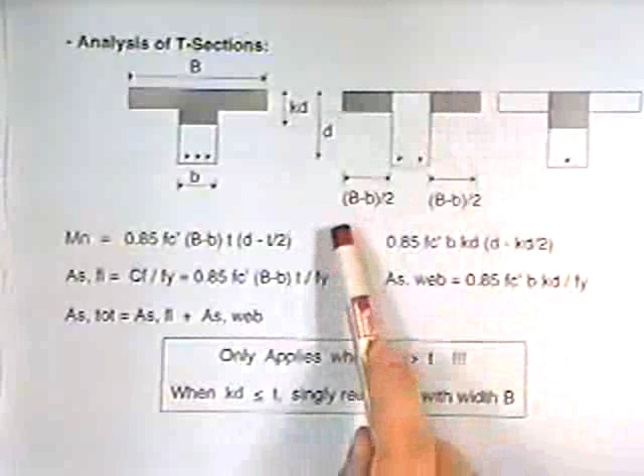What's the moment capacity of this first section? What's the force C sub F? It's 0.85 FC prime, that's the stress, over the area in which it acts. What's the area of these two rectangles? The width is B minus little b divided by 2 on this side, and on the right side it's the same. So it's 0.85 FC prime, big B minus little b, when you add these two parts together, times the thickness of the slab, T.

And where does that compression force act? It acts at the center of the slab, at its centroid. And the moment arm now is just D minus T over 2. So that's the force C sub F, and D minus T over 2 is just the moment arm.

Then we have the part here from the web. And again, this is the same thing as a singly reinforced beam: 0.85 FC prime B times KD, that's the force, times the moment arm, which is D minus KD over 2. When you sum these two parts together, that's the total moment capacity.

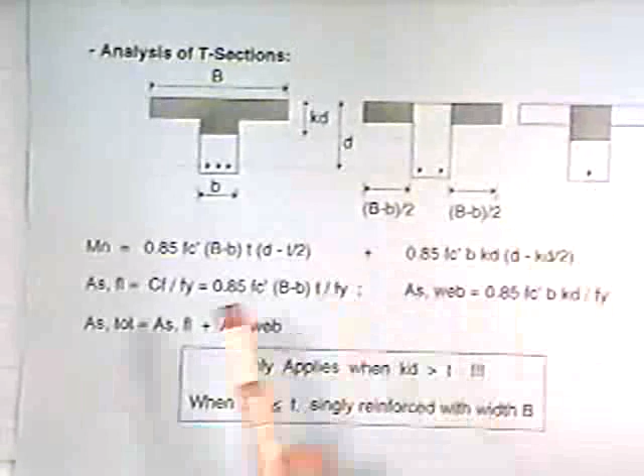Now, you notice here I had 3 bars in the original section. In this section, I only drew 2, and in this section, I drew 1. Equilibrium says that C must equal T, right? Here it is: C sub F, the force in compression, has to equal T, where T equals AS times Fy. So if I divide the force in the flange, which I know is 0.85 FC prime times big B minus little b times T, by Fy, I can find the area steel required for our first shape.

Then what I do is the same thing for the second shape: I find the force in compression there, divide that by Fy, and that gives me the area steel required for the second shape. If I add those two area steels together, I get my total required. Now again, this only applies when KD is greater than T; when it's less, we're just going to use a singly reinforced beam.

So one quick clarification: your C sub F is your Mn minus the last part of the equation, D minus T divided by 2 — that's your C sub F. C sub F is the force: 0.85 FC prime times big B minus little b, times T. That's the stress in concrete, and it's the force from the concrete in compression. The stress we know is 0.85 FC prime, uniform over this area, and the area is just big B minus little b times its thickness T at the slab. So this thickness here is T.

Okay, T-section design. Now, the moment capacity in the flange, I already told you, was the force in compression in the flange times its moment arm — that's this. Now, if you know your demand moment, and you made some calculation that KD is greater than T, you find your moment capacity in the flange. The moment required in the web is just the demand divided by phi, minus what was found in the flange.

Now, next thing you do is you compute your compression block, that's K, from this formula, and that's based on M in the web.

Design the area steel required for the flange: that's the moment divided by its arm divided by Fy, or C sub F divided by Fy, which is equal to this. The area steel required in the web is the moment in the web divided by its arm divided by Fy, and then to find the total reinforcement, you just sum the two together.

Alright, and again, you have to check this versus the minimum, and then the next step is you have to make sure that rho is less than 75% of rho balance, or K is less than 75% of K balance. It's the same thing, okay, it's just manipulating equations.

Now, K balance I know is beta 1 times 87,000 over 87,000 plus Fy. The compression force at balance is the part from the flange, plus the part from the web. The part from the flange we can find from here, the part from the web is found from here. That's with this value of K, substituting into here.

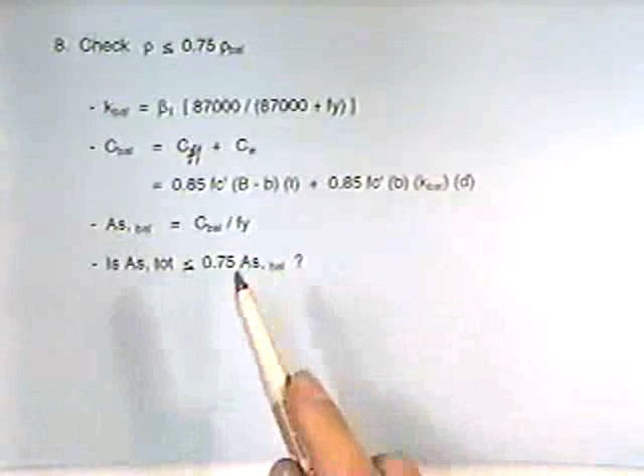I had a good example problem, but then I took it out. Typically what you would first start off, and you would say, just like you would in a regular singly reinforced beam, is you assume that the bottom steel yields.

And if you do that, you can calculate D, and you can calculate your KD. Then you would check to see if it's only in the flange or it dips into the web. If it's only in the flange, you just consider the singly reinforced beam analysis. If it continues into the web, then you use this previous sheet that I just showed you.

Doubly reinforced beams is the same way. What we're going to do is do it in two parts. Again, the section looks like this. We have a compression force in the concrete, a compression force in the steel, and what we're going to do is handle it in two parts.

Number one, we're going to forget the compression steel at the top and compute a moment capacity. Then we're going to consider the compression steel and find another moment capacity, and then add them together. Okay, for design, what we're going to do, again, flowchart type procedure.

You're given a demand moment, a B, a D, an FC prime, and an Fy. Determine the maximum moment that can be taken by a singly reinforced beam. Alright, so that's step one, and the way we're going to do this is like that other flowchart: again, compute your desired K. What I'm saying is let's use K max, which is 75% of K balance.

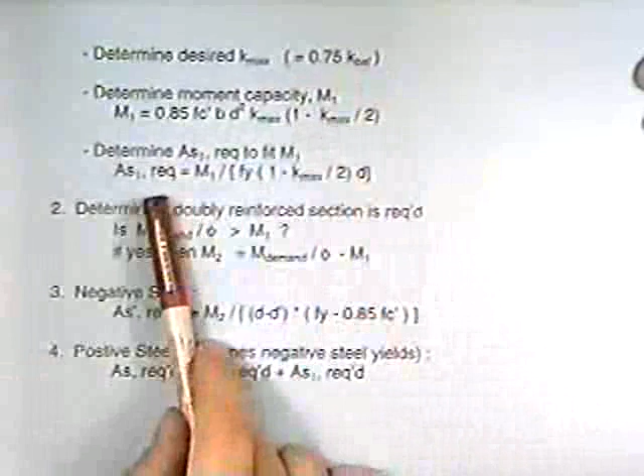Let's find the moment capacity, what I call M1. That's based on this K max from up here: 0.85 FC prime BD squared times K max times 1 minus K max over 2. The area steel required for that, you find from this formula. And now, determine if a doubly reinforced section is required.

Up to here was just singly reinforced. If this provides you enough moment, then you're done. Alright, if it doesn't, then you need to design compression steel at the top, and the amount that you need is the demand divided by phi, minus what we just found from up here.

So the total area steel on the negative side is found from this equation. All right, and the total area of steel now required on the positive part is the part that we found from the first case, plus the part that we just needed now for the second case, summed together.

Okay, and I know this isn't enough explanation, but hopefully the flowchart will help you during the exam. All right, it takes me a whole semester to do this. All right.

Hey, Joe? Yeah. We feel a little better.

I don't understand under what circumstances you'd want to go doubly reinforced versus just increasing your other dimensions or increasing steel in the singly reinforced case. It seems to defy logic putting steel at the top of the member. You're right, for flexural strength, the amount of compression steel you put at the top isn't that effective, if you think about it realistically.

But there are other problems. When you add compression steel at the top, under sustained loads—long-term loadings—concrete creeps when under load for a long time. If you put compression steel at the top, that steel helps resist some of those compression forces, and steel doesn't creep much. So the steel helps the beam's creep characteristics. That's really the main reason.

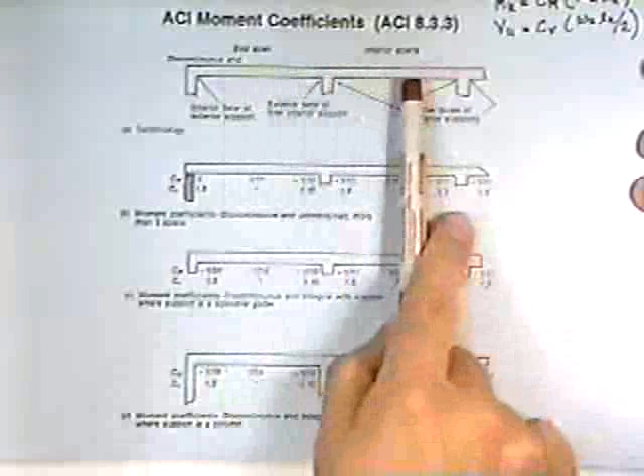If you have a structure that looks like this, it's in section 8.3.3 of the code, and this is some of the terminology. This is an exterior face of exterior support. Here's your beam running across the top. This is an exterior span, this is an interior span. You have a discontinuous end, this is a continuous end. You have an interior face of exterior support, and an exterior face of first interior support, that's over here.

There's a bunch of conditions you have to meet. Number one, the spans are a certain length. You have at least 3 of them. The live loading isn't considerably greater than the dead loading, or something like that—you can check in 8.3.3 about those. But if you meet those conditions, you can use these formulas.

If you have a beam, say for example you have columns here and a beam running across the top of the columns, the design moment of this beam at this point is 1/16 W sub U times L sub N squared, where WU is the factored uniform loading and L sub N is the length of the span. You guys don't have this on your sheet, so you may want to write that down.

The moment is equal to C sub M times WU L sub N squared, and the ultimate shear demand is C sub V times WU L sub N divided by 2. C sub M and C sub V are found in these figures, depending on what you have. You can look at the captions to figure out what type of structure you have. These are all for continuous beams.

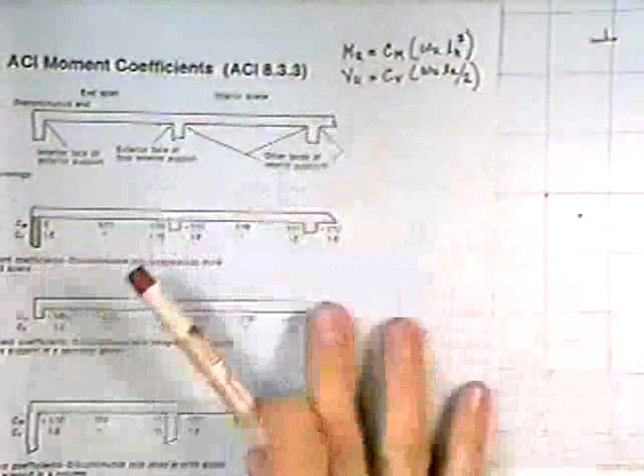Could you zoom in on that formula up there? You can't really see it on the screen. Couldn't read that, huh? Beautiful though—I told you you had to use at least 2-point font.

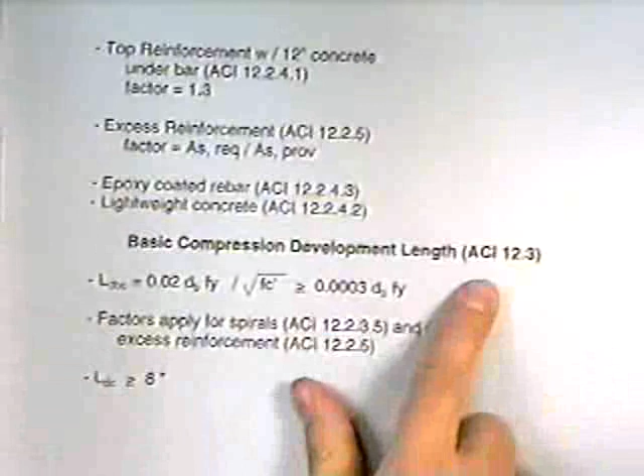Development length is: if you have a bar buried in concrete, how much of this bar do you have to bury before yield strength occurs? Can I just stick the bar in an inch and expect to develop yield strength? Probably not. You have to put it into the concrete a certain amount.

So what happens if you don't have enough length in the concrete? How can you change that development length? One thing you can do is put a hook on the end of the bar, which provides more resistance to pulling out, and you'll see that in these factors. There's a basic development length you need on a hook, the 1200 dB divided by root of FC prime.

You also have a bunch of factors for this. The final development length when you use a hook has to be greater than 8 times the diameter of the bar, and also greater than 6 inches. Here are all your factors — you guys can read that at your leisure, which I know isn't much.

As far as cutoffs go, how far do you continue bars? If you design the negative moment at a point, do you continue those negative bars to infinity? You have to follow the moment diagram. All bars must cover the design envelope, or moment diagram, and provide an additional 12 times dB or D, whichever is larger, plus sufficient development length.

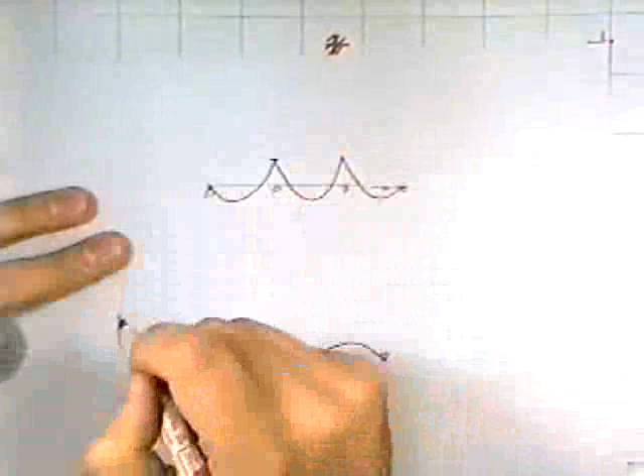You designed the steel for this point, say that turns out to be 3 number 8 bars. We already know you have to provide at least a certain amount of development length on each side before the bar becomes fully active, plus the code says you have to provide an additional distance of either 12 dB or D. You guys can't see that at all, can you?

Here's your moment diagram. It's plotted on the tension side. So wherever you see your moment diagram on this part, you see it on the bottom — that's telling you the bottom of the beam is in tension, so you need to put steel on the bottom. Over here, put steel on the top. Bottom, top, etc.

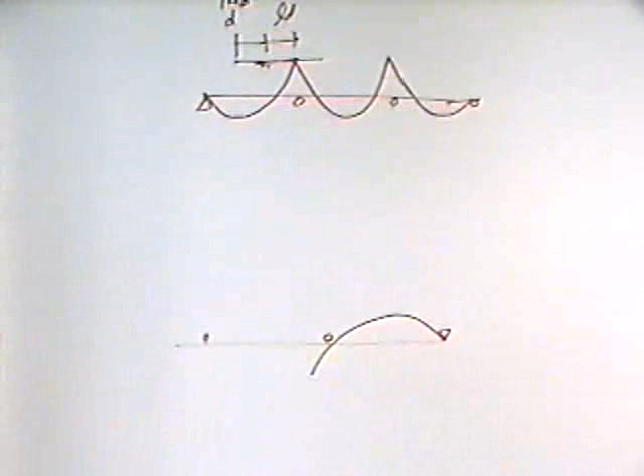One of the questions they could ask is, where does the steel go? They could give you a continuous beam and ask where you'd need to provide flexural reinforcement. The biggest thing to remember is that concrete is terrible in tension, so put steel where it goes into tension.

There's also two sheets on tension splices, lap splices. It's more or less the same thing, and it depends on the area of steel that you have in your section. You can go back and take a look at those. What it's telling you is that it's based on a development length. You're either using the development length itself, or 1.3 times the development length, or 1.7 times the development length. Lap splices exist because if you need a bar, say, 60 feet long, maybe you can't find one that long — you can only find it at 20 feet. So you have to overlap them a certain distance. That's what we're finding here.

How about shear reinforcement? Shear reinforcement has a nominal capacity — the capacity from the concrete. Remember from the first couple of sheets, the shear resistance in concrete was 2 root FC prime. And if you put in stirrups, there's an additional resistance, that's V sub S. Again, for beams, the resistance in the concrete is 2 root FC prime B times D. If you're in a column that's in compression, the equation changes slightly — you get an additional term, N divided by 2,000 times AG, where AG is the gross section area of the concrete, and N is the axial compression load.

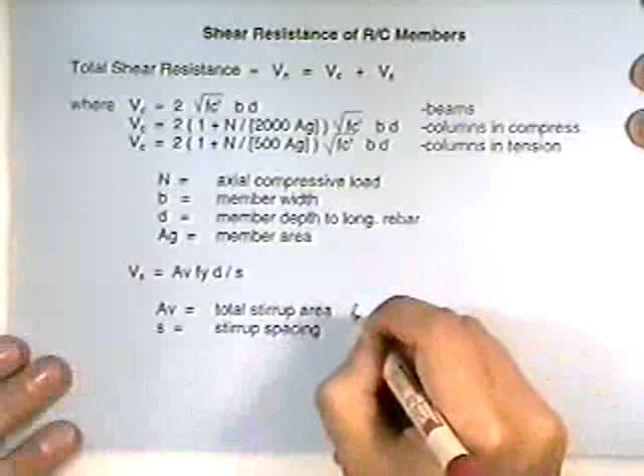Everything else here you know. The A sub V is the area of the stirrup. So if you're using a number 3 stirrup, basically you're going to have 2 times the area of the bar.

Because for that beam to fail in shear — if you got yourself a simply supported beam, cracks are going to develop this way, in shear. And if I look at one section, there's my stirrup — this crack is going to go through both of these bars. So that's why you got 2.

So if you're using a number 2 or number 3 bar, you're going to use 2 times 0.11 into this formula. Now, for design, what we're going to make sure is that the demand is less than its nominal capacity times this factor for shear, which is 0.85. If the demand is less than phi times the part from the concrete divided by 2, then no shear rebars are required — the concrete can take it all. If the demand turns out to be greater than half of its resistance in the concrete, but less than the total resistance in the concrete, then you must provide a minimum amount required by the code, which is this formula here. The area steel minimum is 50 times B times S divided by Fy.

The spacing of these bars must also be less than either D over 2, and it must also be less than 24. If the demand turns out to be greater than the part from the concrete, but less than the part from the concrete plus this minimum provided from the previous part, then again it's the same — your area steel required is just the same as before.

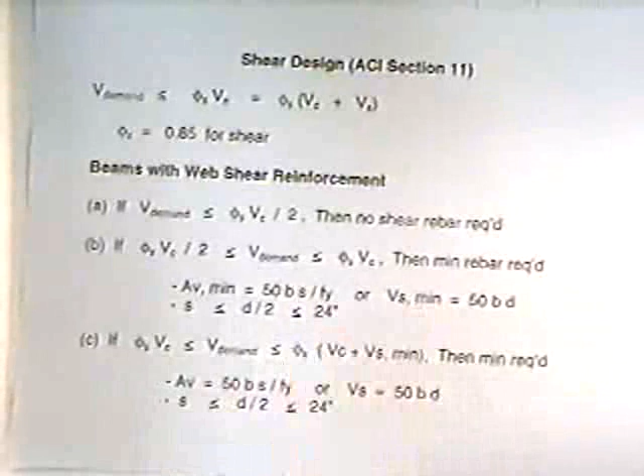If you now jump to the next region where you exceed this part, but it's less than the part from the concrete plus 4 root FC prime BD, then the steel required is the demand minus the part from the concrete, and the area steel required you can find from this formula. Now, if you're using a number 3 bar, the AS required is 2 times 0.11. You know the shear required, you know Fy, and you know D. The only thing you're going to calculate now is the spacing of the bars, and this spacing must be less than D over 2 and must be less than 24.

If your range falls greater than 4 root FC prime but less than 8, then you can use this procedure. Now the thing that changes here is the maximum spacing — we went from D over 2 and 24 to D over 4 and 12. This is where shear is really dominant in the behavior of the structure. Shear is a very brittle failure mechanism, and we try to avoid that as best as possible.

As far as the critical distance goes — if you have a beam that's continuous over a column, your shear diagram may look like this dotted line. The critical distance for shear is a distance of D from the column face. So here's your column face, you move a distance of D over, and you design for this amount right here — you don't have to design for the peak, you can design for this amount. The reason is because of the way this thing is going to fail. Remember, shear cracks occur at a 45-degree angle. So look at the length of this line compared to the length of that line — you have more resistance out of this line, even though the demand is greater. So the critical one's going to be right here.

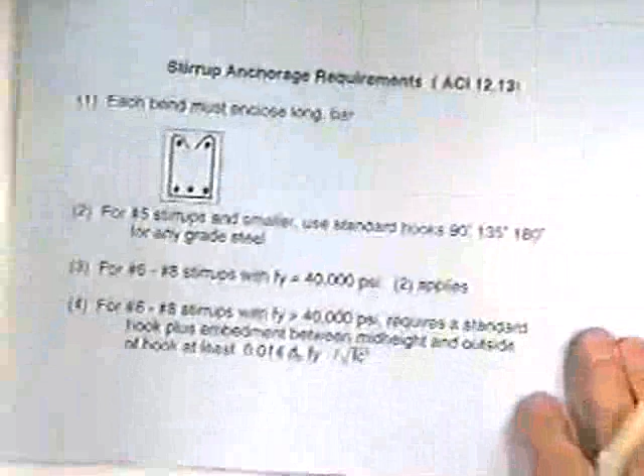And there's also some anchorage requirements for stirrups, and that's just procedures from the code. You can catch up on that. And I also showed you...

The design for one-way slabs is just like designing a beam, except we're going to assume we have a width of 12 inches, and we find the required area of steel needed in that small piece. It's the same flow chart I showed you for beams, except it's only 12 inches wide. The yields will be in inches squared per foot, so you may put down 2 number 8 bars per foot of slab, spacing number 8 bars at 6 inches all the way across. The maximum bar spacing for bending is either 3 times the thickness of the slab or 18 inches.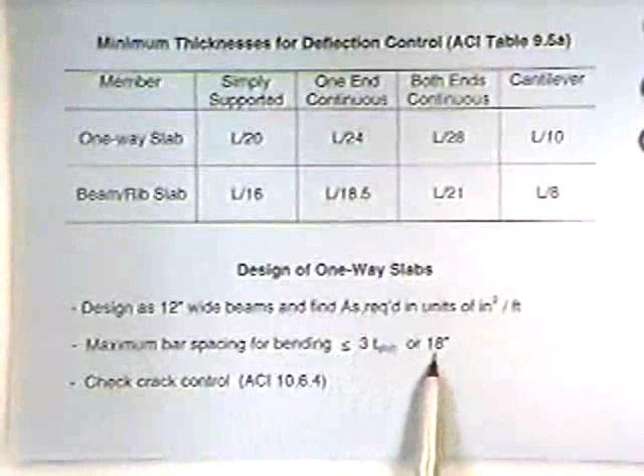You also have to check for crack control—I'll do an example of that. There are shrinkage problems in concrete you also have to account for. If it bends in one direction, it will also shrink in a direction 90 degrees from the bending direction, so you have to provide steel in both directions.

And the area of steel—another quick table—can look something like this. Again, this comes from the Lindeburg book, and it's useful when you design slabs.

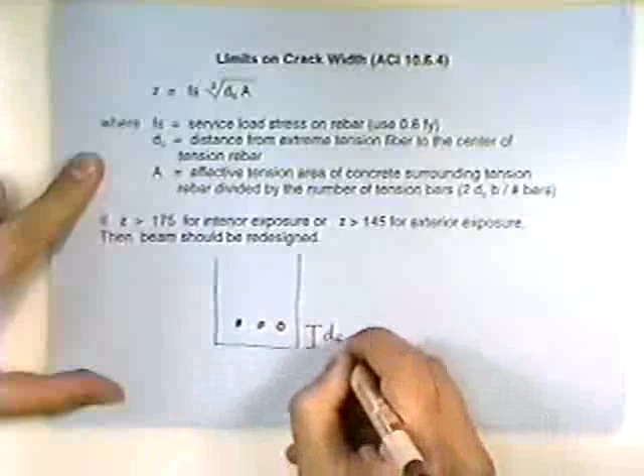So if I draw that down here, here's your rebar—that's D sub C. A is the effective area of concrete surrounding the tension rebar divided by the number of tension bars. This is 2 times D sub C, because you have tension concrete below and above—here's also D sub C—so it's 2 times D sub C times B. That's this area, and then we divide this by the total number of bars across this layer.

Once you plug these in, if your Z turns out to be greater than 175 for an interior exposure and 145 for an exterior exposure, then the beam should be redesigned. If you're less than that, then you're okay.

This could be a legit problem on the exam. I believe when I took it, I had a simply supported beam or a cantilever beam, and I had to find the demands. I had to design it for flexural strength, shear strength, check for cracks, and check for deflections. Deflections is the next part.

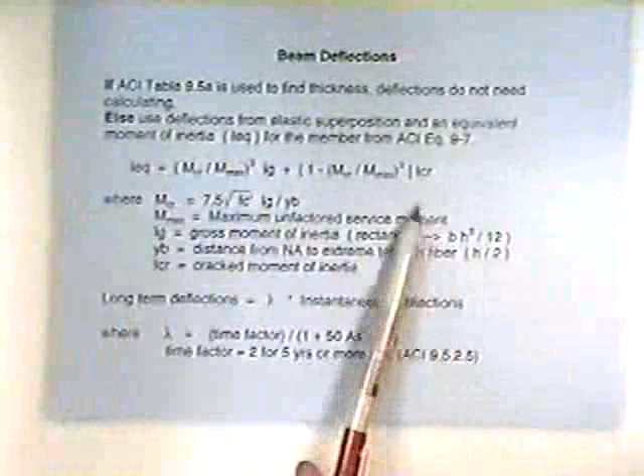If you use table 9.5a to find its thickness, you do not need to calculate deflections. If you don't, you have to use an equivalent moment of inertia for deflection control. I equivalent equals the cracking moment divided by M max, cubed, times I gross, plus 1 minus the cracking moment divided by M max cubed, times I crack. The cracking moment we found before was 7.5 root FC prime times I divided by Y sub B. Go back into the first stage and you'll see this equation.

M max is the maximum unfactored service moment. Remember, we're trying to find deflection, so is it really necessary to compute deflection at the ultimate? What we're worried about is when a person walks on the floor - we just want to make sure this beam doesn't bounce all over the place. So this is based on service loads. You do not have to multiply it by any load factors.

I gross is the gross moment of inertia, and typically it's just a rectangle - BH cubed over 12. Y sub B is the distance from the neutral axis to the extreme tension fiber, and in this case it's normally half the height of the beam. I sub crack is the cracked moment of inertia - remember we discussed that too, that 1/3 base times height cubed formula.

So you can compute your I equivalent, and once you've got it, if you have a simply supported beam, everybody's going to bring an LRFD manual. In that manual it has deflections for a simply supported beam with a uniform load across the top, and if you look in that book, you'll notice it's a function of EI - you're going to be dividing by EI. The I you use is this I equivalent. So you're using the elastic formulas with this equivalent moment of inertia to calculate your deflections.

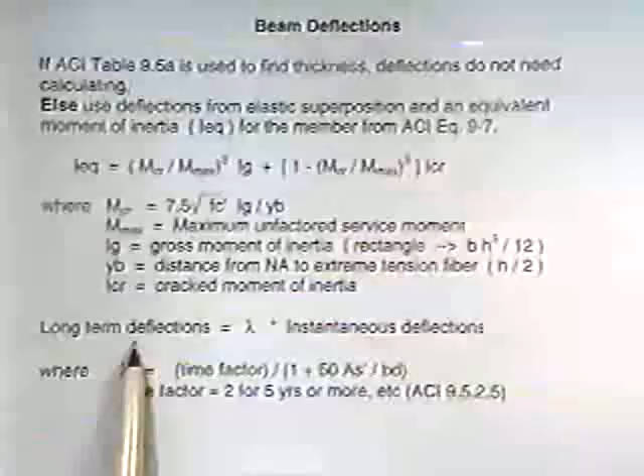Now, those are short-term deflections. For long-term deflections, you multiply the instantaneous deflections, or what you get from the first part, times this factor lambda, where lambda is the time factor divided by 1 plus 50 AS prime divided by BD. Someone asked before why you need compression steel - long-term deflections will be a lot less when you have AS prime. When this term is 0, the factor for lambda is larger. Notice how you divide here - the time factor, if you're dealing with 5 years or more, is 2, divided by this term.

All right, now let's do an example. This is a very legitimate problem for the exam, and this is probably something very similar to what I had on my exam.

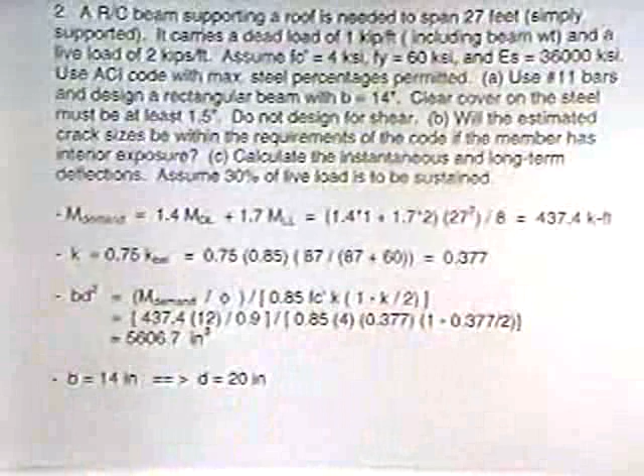You have a beam supporting a roof, and it needs to span 27 feet. It's simply supported, carries a dead load of 1 kip per foot (including beam weight), and a live load of 2 kips per foot. Assume FC prime is 4 and Fy is 60. The modulus in the steel is 36000 KSI. Use the ACI code with maximum steel percentages permitted, number 11 bars, and design a rectangular beam with a width of 14 inches. Clear cover on the steel must be at least 1.5 inches - they don't have to give you that, by the way, because it's all in the code. And it said not to design for shear.

Part B is, will the estimated crack sizes be within the requirements of the code if the member has interior exposure? So we're comparing Z to 175. Part C is to calculate the instantaneous and long-term deflections. Now we're supposed to assume that 30% of the live load is used when considering sustained loads. Now, you have a simply supported beam - what's the design bending moment?

WL squared over what? Gee, I don't know, it's in the book. 8. Okay, if you go into your LRFD code, you can see that. Alright, if you don't know it offhand, just run to the code. So that's what you're going to see here. You'll see WL squared divided by 8.

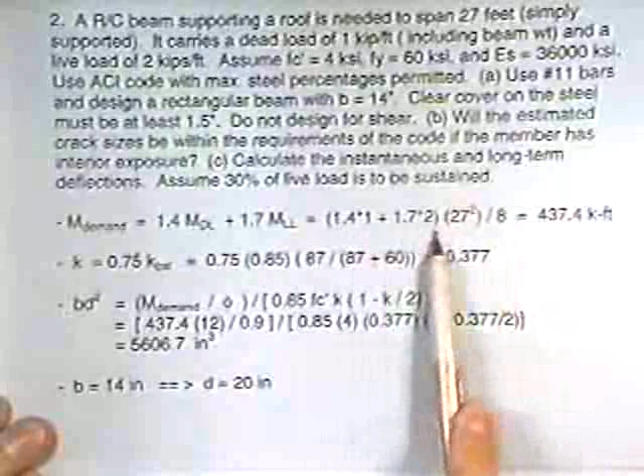The W is the factored W. It's 1.4 times the dead load part plus 1.7 times the live load part. This gives us 437.4 kip feet. This is the demand moment.

K maximum is 75% of K balance. We know the formula for K balance. That's 0.377. Again, this is following my first flow chart. BD squared is equal to the moment demand divided by phi divided by this factor. You know everything, plug them in. Watch your units. You get about 5,600 cubic inches.

Now, it says in the problem to use B of 14. When you use that, D turns out to be 20. Okay?

The area of steel required, again from the flow chart, is the moment divided by phi divided by Fy times D times 1 minus K over 2. This turns out to be 6 inches squared. This is the maximum that you can use because you set K to be 75% of K balance. If you try 4 number 11 bars, which the book says to use, the area provided is 6.24. Notice the maximum allowed was only 6, and we're providing 6.24.

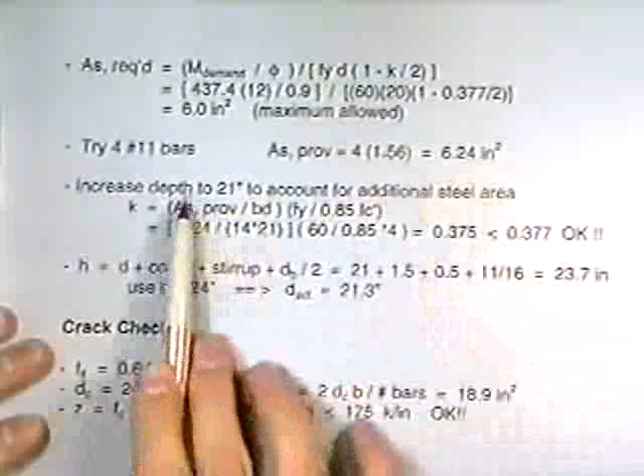So what we've got to do is make more concrete, have a bigger section. Instead of having a depth of 20, let's make the depth 21 - give it another inch. When we do that and calculate K from this formula, you see that K, which is 0.375, is less than 0.377. So it's okay.

Now the H that we need is, again, D plus the cover plus the stirrup plus half the longitudinal bar diameter. Turns out to be 23.7. If we use a 24-inch deep section and recompute D, it turns out to be 21.3, which again is bigger than what we assumed, so we should be okay.

Now let's check for crack control. The stress in that bottom layer of steel, I told you to use 60% of Fy. That's 36 KSI. D sub C is the distance from the extreme tension fiber to the centroid of the area of steel. That's the total height H minus D, which is 21.3. This gives us 2.7 inches.

The area, in your formula for Z, is equal to 2 times D sub C times B divided by the number of bars. What we have is 4 bars, so this A turns out to be 18.9 inches squared. When you plug it into your formula, Z turns out to be 133.5, which is less than 175, therefore it's okay.

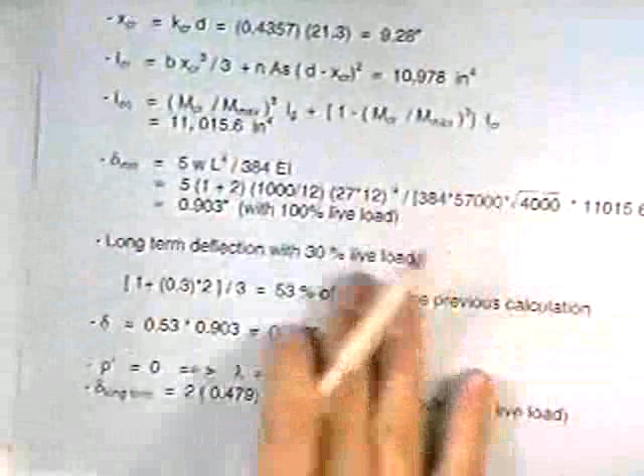We need to go into our formula, and basically what we're trying to do is find this I equivalent, and we have to find all these variables in here. So where I'm going to first start is with I gross. I gross for this beam is just 1/12 the base times the height cubed. The base is 14, I told you the height now was 24. This turns out to be about 16,000 inches to the fourth.

The maximum moment is WL squared over 8, but this is unfactored now. For deflections, we're talking unfactored loads - it's dead plus live, L squared divided by 8. It's 273.4 kip feet. This is unfactored.

The rupture modulus is 7.5 root FC prime. This gives us 474 PSI. Y sub B is H over 2, or 12 inches. The cracking moment we know is FR times I gross divided by Y sub B. Plug these three into here, you get 53.1 kip feet.

You divide your cracking moment by the maximum moment here, and there's this factor, 0.0073. When you cube it, that's the number you get.

N is the modular ratio - it's the ratio between the modulus of the steel and the concrete. The steel is 29,000 KSI. For the concrete, it's 57,000 root FC prime, and this gives it to you in PSI. This thing here is in PSI. Your N turns out to be about 8.

Rho is equal to the area of steel divided by BD. It's 0.0209. Remember your formula for K cracking - it was a function of rho and N. When you plug it in, K turns out to be 0.4357.

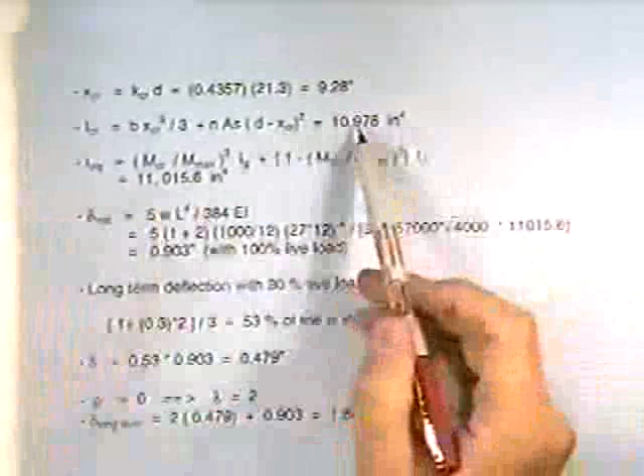Okay, let's take a look here. When the section was fully cracked, we got a moment of inertia of 10,978. When it was uncracked, or the gross section, you see it's 16,000 on the previous sheet. So you notice the equivalent I that you're using is closer to the cracked value, and the reason is because the demand moment is very close to cracking.

Now your instantaneous deflection, this is where the LRFD comes in. You pick out that formula: 5 times W L to the 4th divided by 384 EI, where W is the dead plus the live load. The length is 27 feet. All of these factors are just unit factors, either to get them into kips or into inches, and then you divide by 384 times EI.

What you get is 0.9 inches. This is with 100% of the live load, and that's what the problem told you to do.

Now for long-term deflections, only considering 30% of the live load, what we're going to do is multiply our lambda times some instantaneous deflection. Well, what's the instantaneous deflection when the live load's only 30%? That's the dead load part plus the live load part, which was 30% of 2. And then if we divide this number by the part we used in this calculation, which was 3, this will tell us the instantaneous deflection when you have dead and 30% of the live load.

That number turns out to be 53%. So the instantaneous deflection is 53% times the 0.903, which is 0.479. And then when we multiply this by lambda, this gives us our long-term deflections.

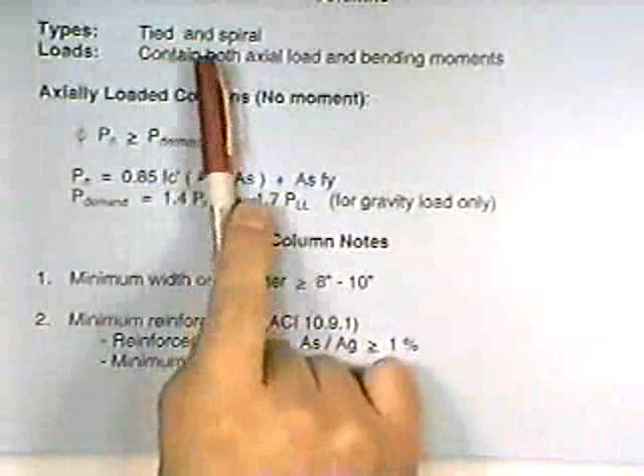Okay, the next thing is columns. For columns there are 2 types. We defined this before: there's tied columns and there's spiral columns. Tied columns are typically for either square or rectangular shapes, and spirals are used for circular shaped columns.

Now, column members can contain both axial load and bending moments. A beam only takes bending moments, so a column is different than a beam. It's a different design procedure.

This exam, I don't know what type of question they can ask you on a column, because it's a very tough calculation. Typically what people do is use spreadsheets, and I know you can't bring a spreadsheet into this exam.

So if they say, well, here's a column that just has axial load on it, then it's a quick and easy calculation. What you have to make sure is that your capacity, which is phi times its nominal capacity P sub n, is greater than the demand. The demand we find is 1.4 times the dead load plus 1.7 times the live load.

Well, what's its capacity? If the compressive strength in the concrete is 0.85 FC prime, and I multiply by the area of the concrete, which is Ag minus A sub S, where A sub S is the area of steel, and then I add on AS times Fy, this is the maximum compressive force that the column can take. So what you can do is design your column so that it could take the demand axial load.

The demand comes from 1.4 dead plus 1.7 live, or maybe if you have some type of wind load. Some notes: the width or the diameter of the column has to exceed 8 to 10 inches, somewhere in there. It doesn't explicitly say in the code, but I think 10 inches is sort of the minimum for building requirements anyway.

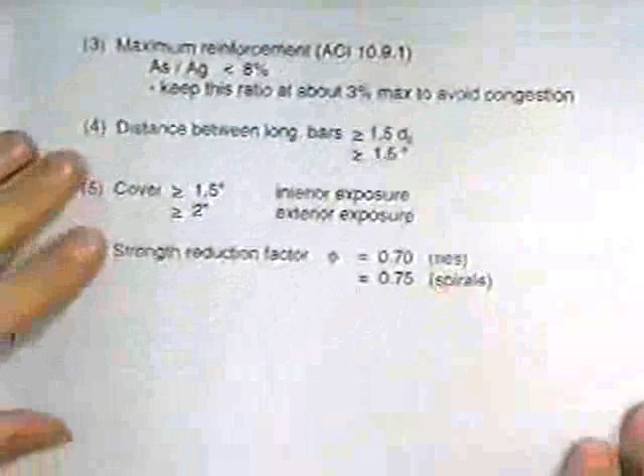Now, there's a maximum reinforcement ratio, and that number is 8%. And if you ever built a column with 8% reinforcement ratio, it's primarily steel. There's no way you're going to get concrete in there. So typically what I say is to try and keep the reinforcement ratio at about 3% maximum to avoid congestion. If you're in a high seismic zone, this number may go up slightly. But pouring the concrete's a real pain.

The distance between longitudinal bars in a column must exceed 1.5 times dB, and it must also be greater than 1.5 inches. Is that center to center, or is that clear space? That's clear spacing between bars.

The cover in a column has to be greater than 1.5 inches for an interior exposure and greater than 2 inches for exterior. The strength reduction factors we also talked about, whether it was tied or spiral. And you see here, for the spirals, it's a little better, 0.75 as compared to 0.7. The reason is because you get better confinement out of a spiral, and we also talked about that before.

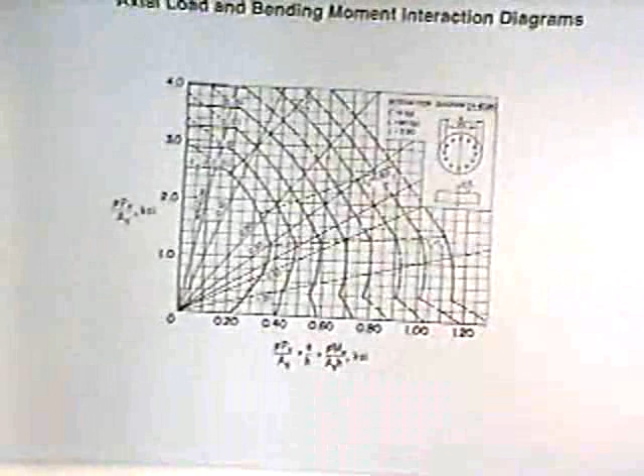Now, if you have a column that has both axial load and bending, there's one way of doing it: bring in a spreadsheet, and then you can do it. The other way is these design charts. I copied this out of a book, and there were maybe 6 or 7 of them, I guess, and I'll try and show you how to use these.

Actually, start with the second page. Okay? Which one? All right, what I'm going to use—that's okay, yeah. I'm going to use the second page, that top figure.

So this has an interaction diagram when FC prime is 3 KSI. The yield strength in the steel is 60 KSI, and this gamma is 0.6. If you look on the figure, gamma is the centroid to centroid distance between the bars times H. Gamma times H, and gamma for this case is equal to 0.6.

So in other words, if the width of the column is 20 inches, the distance between the bars is 6/10 of 20 inches. You've got your bars, you've got your full column. You take off the cover on each side, you take off the spiral or the tie on each side, plus half the bar diameter on each side, and that gives you this distance. If you divide that by the total width, that's how you find your gamma.

Now this is for the case when gamma is 0.6. The figure below is when gamma is 0.75. So if your actual gamma turns out between the two, what you do is an interpolation—you just approximate. Now, the way these figures work is that on the horizontal axis, you're plotting the moment divided by AG times H, where AG is the cross-sectional area of the column.